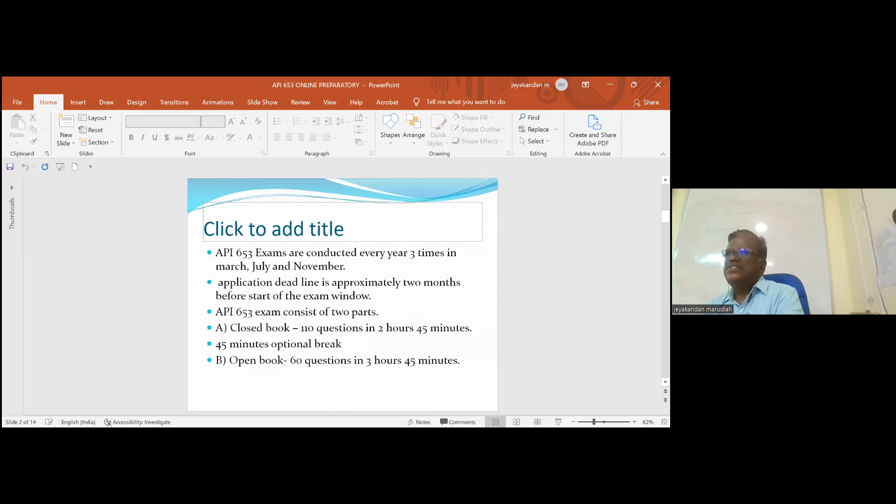653 talks about the in-service inspection of storage tanks. 510 talks about the in-service inspection of pressure vessels, and 570 talks about the in-service inspection of process piping. These three exams are considered major exams in API, and we have many supplementary exams. For example, 571 damage mechanism, 580 RBI risk-based inspection, 936 refractory, 1169 cross-country pipeline. So there are many exams.

Now, many people don't understand the system of API. The first difference between this and other exams like CSWIP, PCN, or AWS is these exams are not conducted throughout the year. They are conducted only 3 times yearly. So they have a fixed schedule - I think since 2014, they are following the same schedule.

Every year in January it will start with 510. January 510, then after 4 months, May 510 and September 510. If you take 570, then next month - February, June, October. If you take 653 - March, then July, then November. This is the schedule. And the next one, April, will be the supplementary exam. This is the schedule they are following.

So first you should know API exams are not conducted throughout the year. We hear many inquiries, people asking, sir, next month I am coming to India, I want to attend the API exam. It is not practically possible because the application deadline ends 2 months before the exam start date.

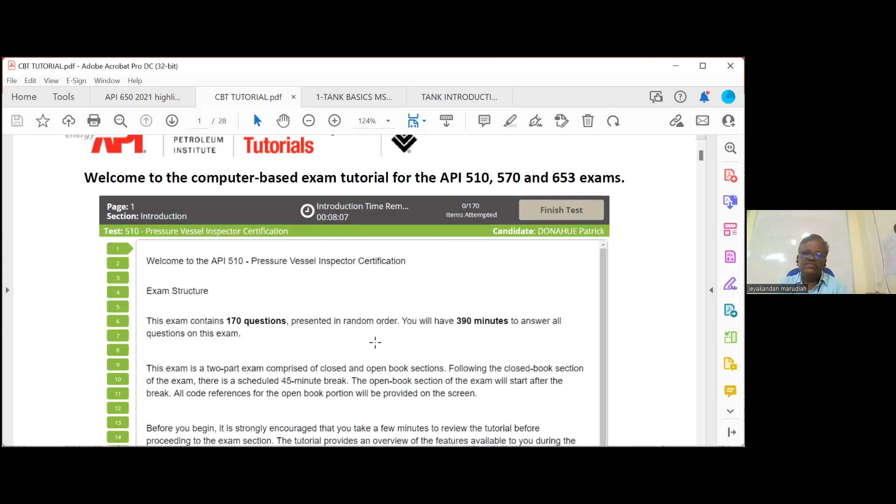Now, what are the key points of this? First, I told there will be 170 questions total. So this is a simple multi-choice question - something like, which of the following biological levels represents the smallest. They've given a sample question; it has nothing to do with biology, our exam is nothing to do with biology. Options like organism, populations, cell - you have to click one.

When you click it, the color will change, meaning you've picked the answer. Now the next doubt you'll have is whether you can change the answer - yes, you can change the answer any number of times. Suppose you want to pick B, pick it. Again, you want to change it to A, you can change it. Any number of times you can change it. The last answer you pick will be recorded by the system.

Okay, then how do you go to the next question? At the bottom there will be a 'next' button. If you want to go back, there will be a 'back' key. Or sometimes you can see the question number at the top.

You can click the question number, it will directly go to the question. So very simple system, not complicated. It's a computer-based testing, we call it CBT. It's a very simple system. Is it clear? So next, you can go back or you can directly go to the question by scroll bar.

You can see which question is not answered, so we can come back to it. You can see that because there is a color change. Once you answer, it is changed to black color, meaning the question is answered. So these questions are not answered. You can just spot whichever is not answered.

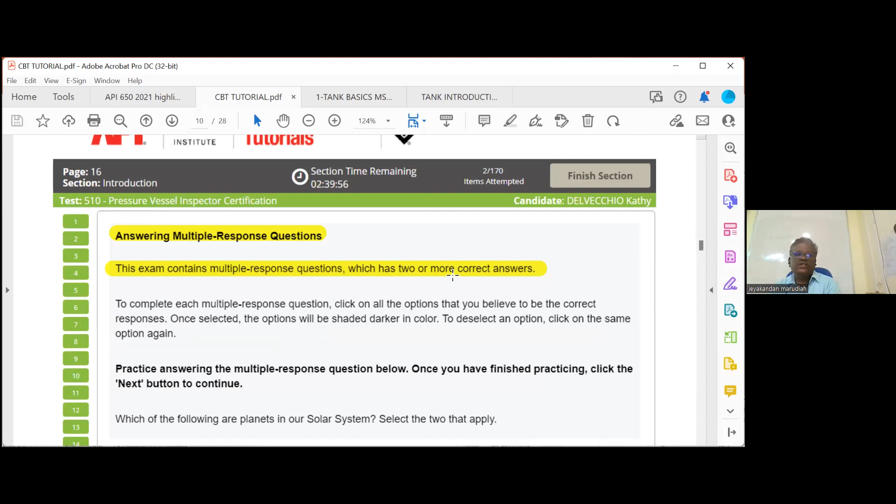Then what is meant by multi-response? The exam contains multi-response questions which have 2 or more correct answers. For example, which of the following planets are in our solar system? They will clearly mention this. Now you will ask, how do I know it is a multi-response question? The question itself will clearly mention it.

The question will say the following question has multiple answers. They will mention 2 or 3, generally multiple. Generally it will have 2, sometimes 3 answers also. So, which of the following planets are in our solar system? You can say Venus, Mars. You have to pick 2. Venus and Mars you have to pick.

Now the disadvantage of this question pattern is, if you get only one correct answer, there is no marking, there is a 0 mark. There is no partial mark. So you can't attend 1 and get 1 mark, 2 and get 2 marks. It's not like that. Everything should be right. Even if 1 is wrong, there will be no mark. Okay, this is called multi-response. Is it clear? That is the second pattern.

The third pattern is drag and drop. What is meant by drag and drop? You can see here we have 4 options: December, horse, June, dog. And we have categories: months of the year, animals. So what is the month of the year? December and June. Click it and drop it. Click it and drop it. Horse and dog, we have to click those. So the answer box should look like this.

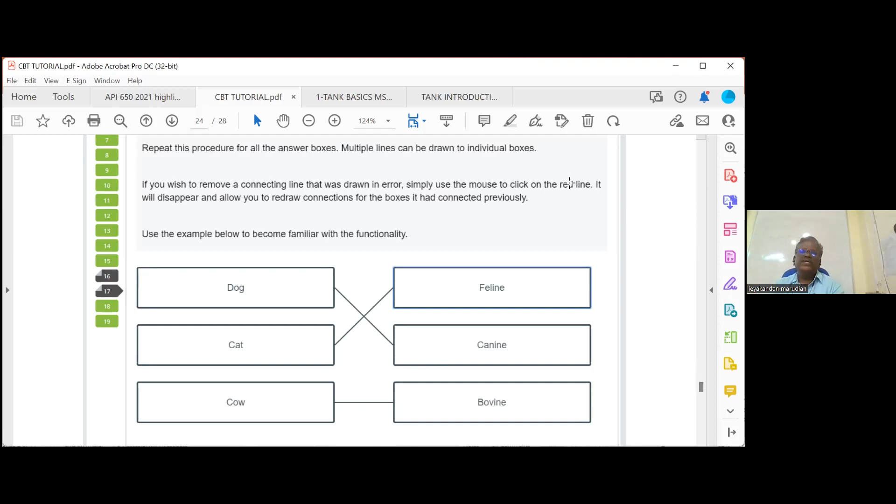So they are converting into... I will explain that. Is it clear? Yes sir. Okay, once you complete the exam, once you finish the exam, there will be a 45 minute break.

During this break, you can go outside, take breakfast, whatever you want, and you have to come within 45 minutes. If you are late, if you come within 15 minutes, no problem, they will switch on the system and allow you to start the exam. But the time will be the same, fixed time only. You cannot add the time. Suppose your first exam you completed in 1 hour, for example.

I have extra 1 hour 45, I have an extra hour - can I add it to the next exam? No, it is not possible. Once you finish the first exam, even if you finish within 1 hour or within 45 minutes, you have to start the next exam. This is programmed like this. The next exam will start automatically.

If you are coming late, the system will start automatically, and the first question will have a timer only. There will be a timer because a watch is not allowed. There will be a timer on the right hand side, and the timer will be running.

Okay, the next one is the open book question. It has 60 questions and the time is 3 hours 45 minutes. Now, same as before, multiple choice will be the majority of questions, maybe 50 questions minimum, then B, C, D all together will have 10 questions.

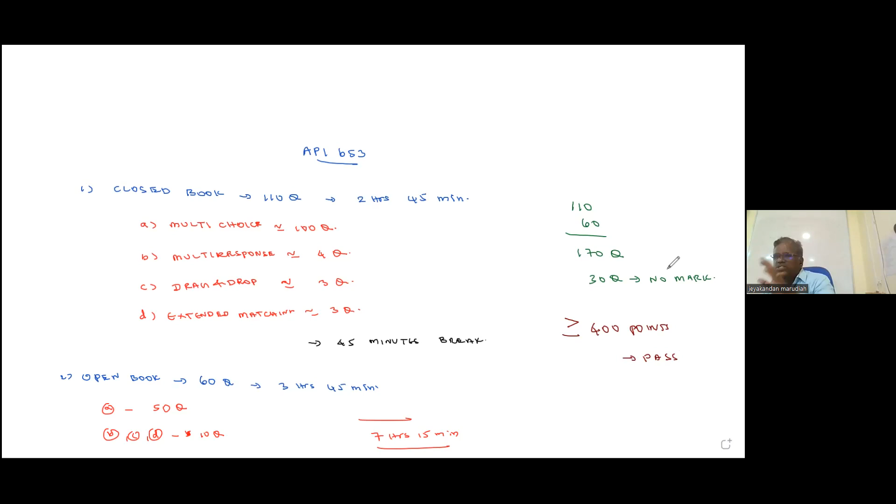Once you finish the test - the first exam finish it, then there is a 45 minutes break, then the second exam will start. There is 3 hours 45 minutes. Then you complete it. Within 15 minutes, exam result will come, hardly, to your mail.

Not the points will come, just a preliminary result will come. They are giving 3 types of preliminary results: preliminary pass, means pass; preliminary fail, means fail; and another result called marginal result. Marginal result means you are neither pass nor fail, you are near the border.

Suppose if you put it in percentage, cutoff is 70%. If you are scoring - because it is system evaluation, there is no manual evaluation, everything you are clicking, system automatically will click - if you score more than 70%, preliminary pass; less than 65%, preliminary fail. But if you are in between 65 to 70, they will hold the results and give marginal results.

So for the marginal results, the final result will come. For all, final result will come after 4 to 6 weeks. It will take a minimum 1 month to 1.5 months. Final result also will come the same day to everybody, to your mail only it will come.

There are 60-40 chances. Those who got marginal result, 60% of the people will pass, even 30 to 40% will fail also.

Once the marginal final result comes, your certificate will be uploaded in the API website. You can access it and take a printout. Even the wallet card also you can take printout of. The hard copy of the certificate will be sent to your home address, but it will take another 1 month, so no need to wait, you can take a printout. Only the certification number is important to apply for any abroad jobs because they can check it, cross check it. So this is how the exam is conducted.

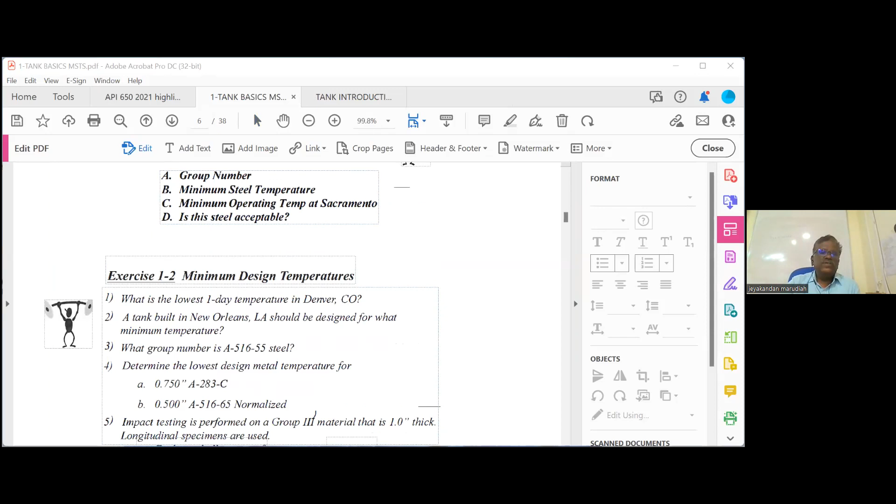So this is the effective sheet for this up to July exam actually. So if you are attending, we have given you the printout - those who are attending directly. So online we will send you soft copies, already sent. So this is for November 2021, March 2022, and July 2022. Okay.

First one, how many code books for our exam? API 571 one, 575 two, 576 three, 577 four, 650 five, 651 six, 652 seven, and 653 eight. So on the API side we have 8 code books, and on the ASME side we have 2 code books, section 5 and section 9. So total we have 10 code books for the exam.

Now, total how many questions do you have to attend? 170 questions. So 10 code books, 170 questions - so each code book 17 questions. It is not like that.

It is not like that—all code books are not equally important. For any API exam, most of the questions will be asked only from 3 or 4 code books. The remaining code books will have just a marginal representation, like 1 or 2 questions only. So out of all this, the main code book is 653.

This is the general pattern—it may change because every year they change it a little bit. But the general pattern is 653 will have 50% of the questions. That's a tough code, 653, the in-service inspection of storage tanks, which will have from 85 to 90 questions. And 650, that is the second important one, 20 to 25 questions.

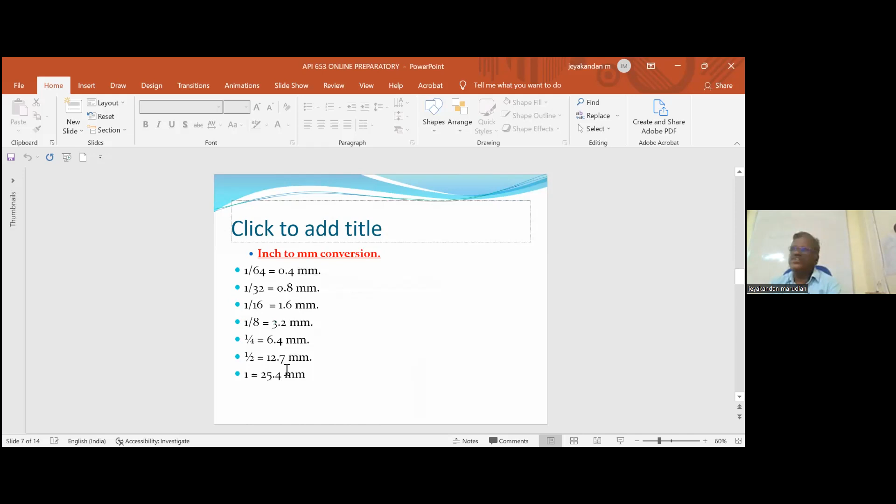Right, now we will go to the actual class. So before starting, I will play a short video on how the tanks work. Before going to that... yes.

So we'll start the class now. All introduction is completed. First question: what is a storage tank? You came here to attend the class for in-service inspection of storage tanks, right? Now the question is, what is a storage tank? Generally our storage tanks, we are going to discuss before, the oil storage tanks only we are going to discuss. Then what is the difference between a storage tank and a pressure vessel?

First, the definition of storage tank: it is a container to store a fluid. It may be liquid or gas. But generally our exam questions will be based on liquid storage tanks, because gas is considered a high pressure storage tank. We are going to discuss only atmospheric pressure storage tanks. So what is atmospheric pressure? I told you, 15 psi. That means inside the storage tank there will be no pressure. What is the outside atmospheric pressure? Same will be the atmospheric pressure, inside the pressure also.

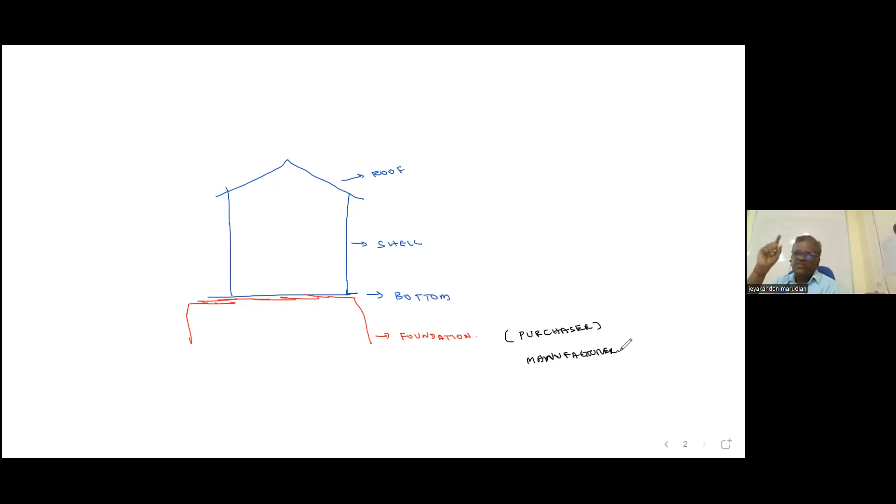Let us start with this. The first one is the bottom. Now if we take the tanks, we are going to discuss a very limited scope - carbon steel storage tanks only, not stainless steel storage. If you take a bottom plate, a tank is a big structure. The bottom plate will have a slope, which we will see later, but the bottom plates are generally lap welded, not butt welded. Lap welding for bottom and roof plates is sufficient. The code does not restrict use of butt weld, but it is not mandatory. If the purchaser wants to butt weld, he can go for it, but it's not a mandatory requirement.

Lap weld is sufficient. Now, if you see, this is my shell and this is my bottom plate. This bottom plate has two names where the shell is seating: one is called the annular plate, another is called the sketch plate. I'll show you the difference. Suppose the bottom plate is like that and the shell is seating on the bottom plate straight away - this location is called a sketch plate. Now, sometimes where the bottom is seating, we will have a high thickness ring for that location, which is butt welded, where the shell will sit. If you're using a high thickness, the other bottom area will be low thickness - only where the shell is seating will have higher thickness. Then these plates are called annular plates.

So now, suppose the bottom plate has the same thickness where the shell is seating, then that area is called a sketch plate - there is no difference in thickness across the entire bottom. But most of the time they will use a higher thickness where the shell is seating, then that is called the annular plate. Now, the code requirement is that the annular plate should always be butt welded - lap welding is not allowed. Whereas annular plate to other bottom plates, we will make a lap weld.

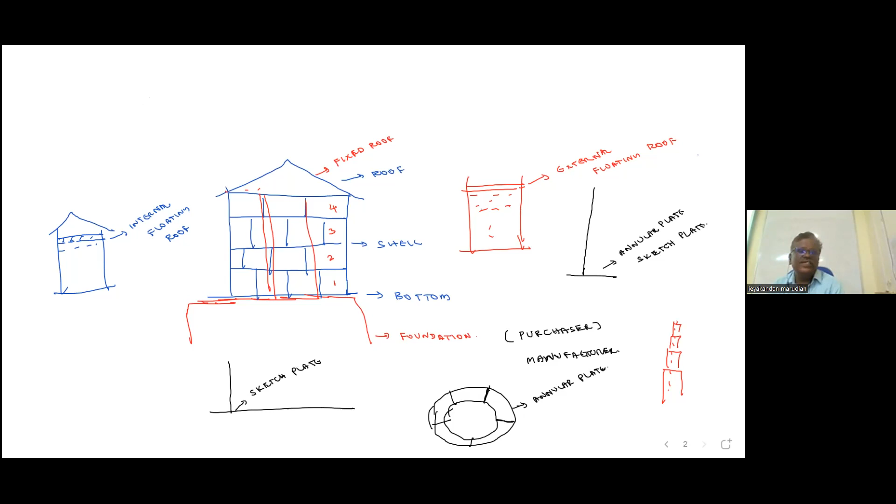For shell to bottom, it is not a lap joint, it will be a fillet weld. Shell to bottom, how is it a T joint actually - fillet weld, it is a double-sided fillet weld generally. But when you are using high thickness, you have to edge prepare in the shell plate, it is a bevel with fillet.

Lap joint, butt joint - I will show you the video for the annular ring. Just watch the video, then ask questions. I think the video will answer most of your questions.

So generally tanks are not constructed one by one, they are constructed in groups actually.

So first we have to prepare the foundation. This is the concrete ring wall. Generally the shell will be seated at the center of the concrete ring wall. What should be the thickness of the concrete ring wall? It should be at least 1 foot - 1 foot means 12 inches, we will use foot only here. So at least 1 foot it should be there.

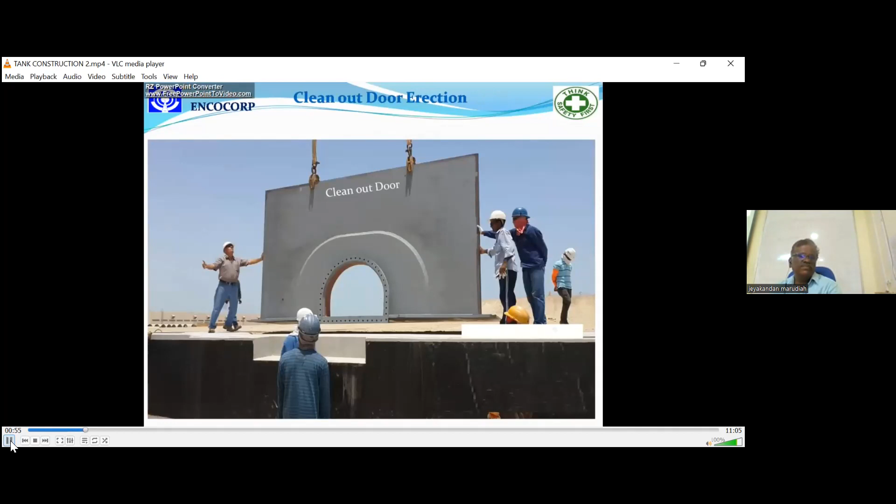So this is the annular plate. This ring is called the annular ring. I told you this annular to annular joint will always be a butt joint, lap joints are not allowed between the annular plates. Yes, butt joint with the backing strip, or you can go for double V also as per code. Both sides of welding is possible, so you can use this butt joint. They welded it, this is annular plate, annular plate, annular plate - they will be a butt joint.

So this is the bottom plate. You can see here annular to bottom plate will be a lap joint. They will lap, that is a requirement. But somebody told that they are going for butt joint. It is, everywhere there are exceptions allowed. So this is a bottom plate.

Overlap, I will say, minimum maximum 2 inch. Maximum 2 inch, 50 mm maximum overlap. But if you are welding single side, maximum 1 inch overlap. These are the code requirements.

Please remember, code requirements may be overruled by your project specification. You can go more stringent than the code requirements. But the exam questions are based on the code requirements only. So you have to understand the code requirements. Practically, you may be deviating from this because of your project rules.

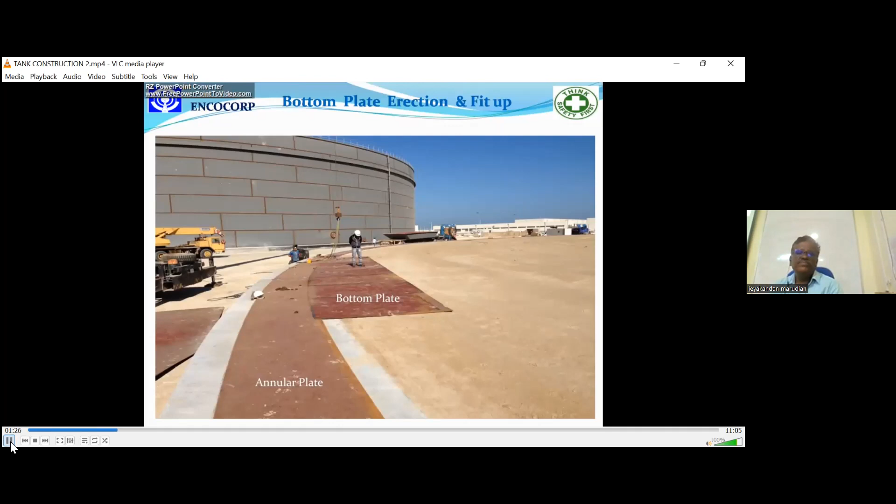So this is the bottom plate. So they will lap it. You can see here bottom lap, here there is a lap. Everywhere there will be lap. It is a complete lap there.

So this is the outlet sump. What is the purpose of outlet sump? Oil storage tanks will have at the bottom a water layer, because when they are drilling oil, oil will have some water mixed in it, or even rainwater enters it.

You know what is the specific gravity of water? The specific gravity of water is 1. And most of the oil stored has specific gravity less than 1. That's why if you take a bottle of water and put it on the oil, water will go down and oil will float. Okay, same way.

So generally water will come down to the bottom. That is called BSW, bottom sediment and water. There will be a layer which you have to remove periodically. Otherwise water, which is highly corrosive, will corrode the tank. So we need a sump, and there will be a pipeline connected outside it with the wall, so periodically they will check for any water and drain it. That's why we are maintaining a slope on the bottom, so that it will be drained.

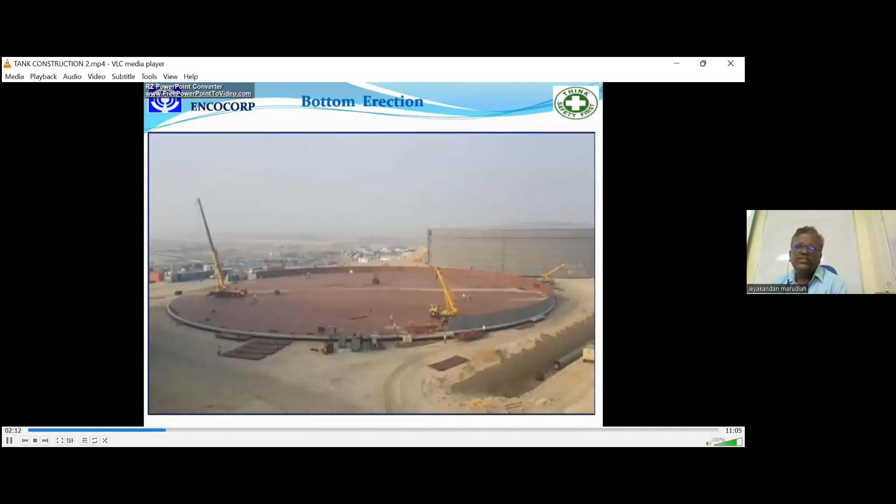So this again is a drain sump, because it will have a minimum of 3 to 4 drain sumps. We are keeping the slope like this. This is one type of erection. We have many types of storage tanks, just a sample one.

Now we will go to the shell. So shell 1, they started erecting. Shell to shell it will be always vertical. Shell to shell vertical joint. Vertical joints are called vertical joints, they are more critical. Okay, so that one is horizontal.

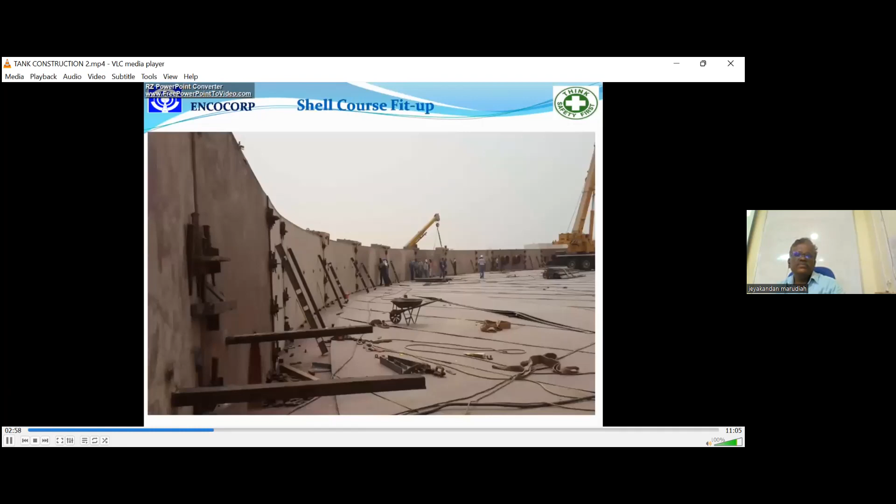Horizontal also they will make a butt weld only. Tank is a massive structure, big structure actually. So this is a vertical joint. I think they are using some automatic welding process, electro gas welding. It's one of the popular auto welding processes in tanks actually.

Then shell course 2. So you can see this is what I told, staggering. The distance between this vertical joint and this vertical joint should be at least 5 times the thickness of course number 1, it should be 5T of the thicker one. Which one will be the thick one? Course number 1 will be the thicker. Every course like this only.

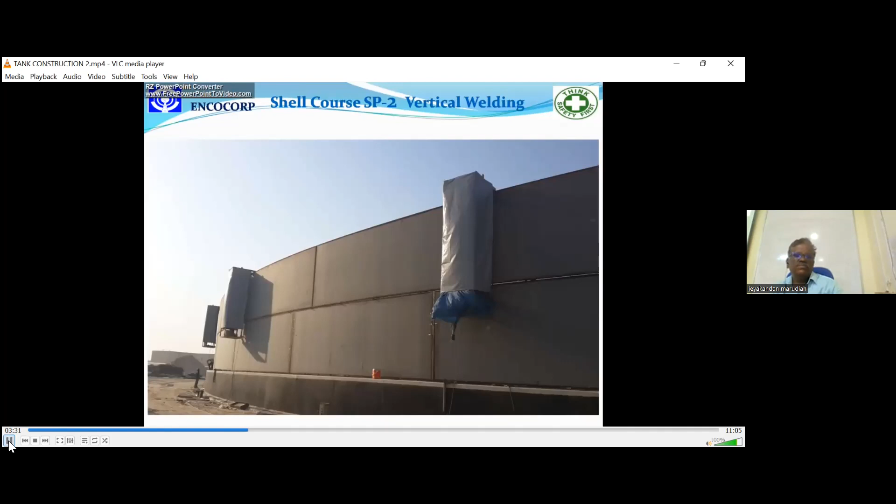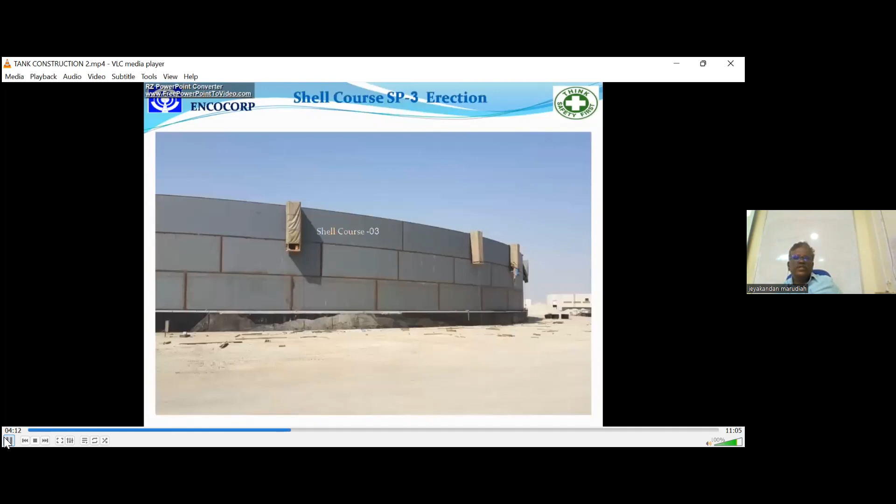So this is horizontal welding. Shell course 3. After 2, there will be everywhere a stagger. The temporary hatch doors, shell course 4 erection.

So this is the wind girder. You can see that there is a girder there. So 1, 2, top shell course. What is the purpose of wind girder? One is the wind, to break the wind. Another one is to maintain the shape of the tank, the round shape, because there will be a lot of wind and the shape cannot change. So that is a wind girder. Wind girder will be at the top shell course.

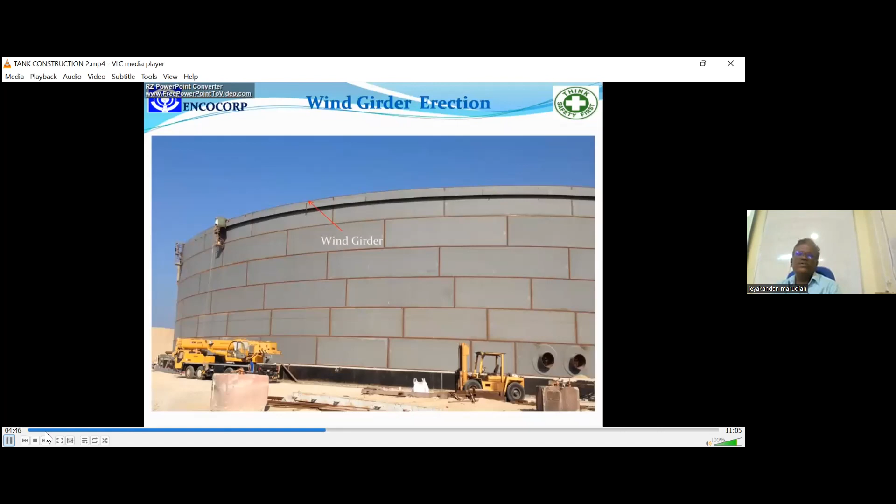So this is called top angle or curb angle. What is the purpose of this angle? From this only the roof plate will be welded. Roof plate will be welded, lap welded again with the shell on one side. See the angle, you know what is the shape of angle? One side it will be welded with the roof plate. So top angle they will call it.

So, or curb angle, they will call it. Now they are going to do the roof erection.

So this is the center column. In the middle of this there will be one column. Column is a vertical one, but they have many columns. You can see many columns to support the roof. Without columns, that is called self-support.

See, this is called girder. Girder means the horizontal one. Column is the vertical one. Rafter means the inclined one. Over the rafter only, roof plates are laid out and lap welded.

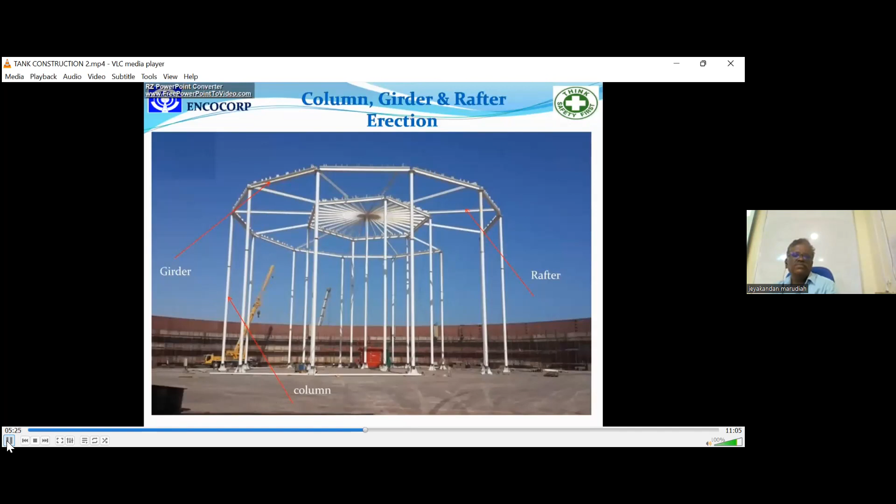So from the center they will go on extending, then finally it will attach with the shell.

Okay, so this is how the final structure will look like.

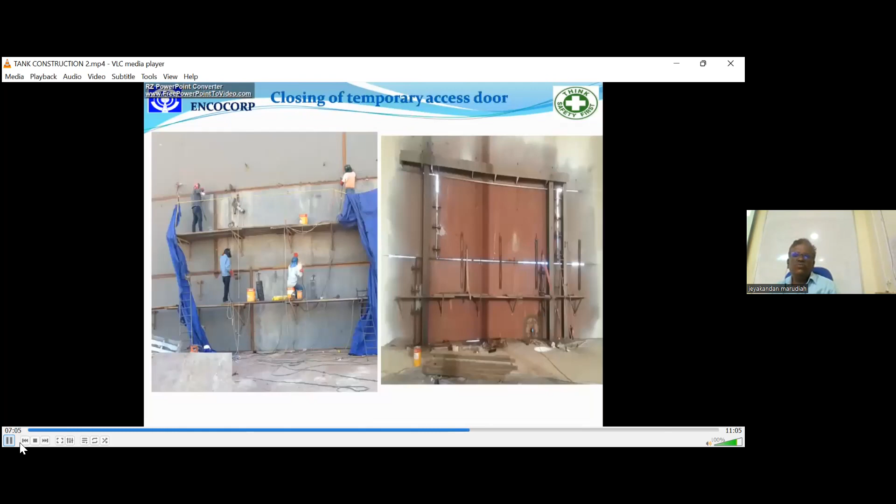Roof can be welded on one side only. Bottom plate is single side lap welding. Roof also only has top side welding. So wherever there was an opening before, they will close the opening finally.

Yeah, a lot of attachments. They will have many things in the tanks.

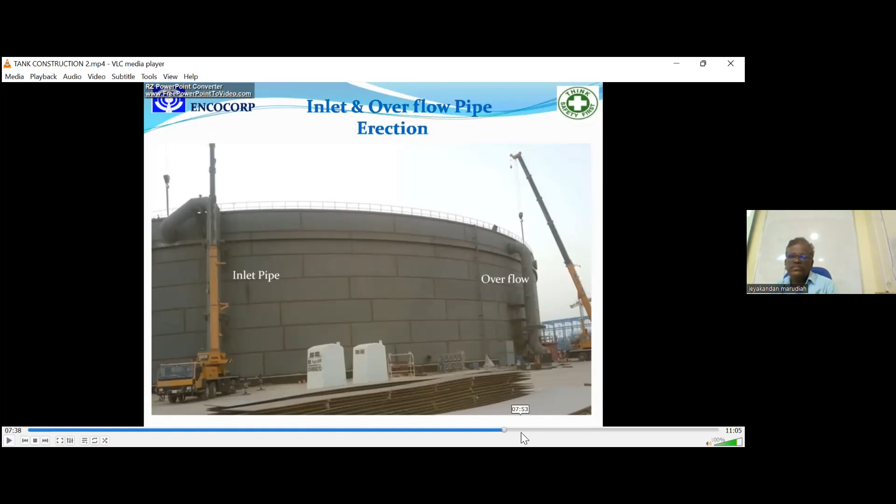Then we will have here ladders. Okay, this is the ladders. Then this is the handrails, roof handrails erection. Then rain down pipe from the roof. Any rainwater we have to bring down, that is the rain down pipe.

Painting, leave it, painting not required. Now we will go about one more thing, about the floating roof tanks. Just a short video.

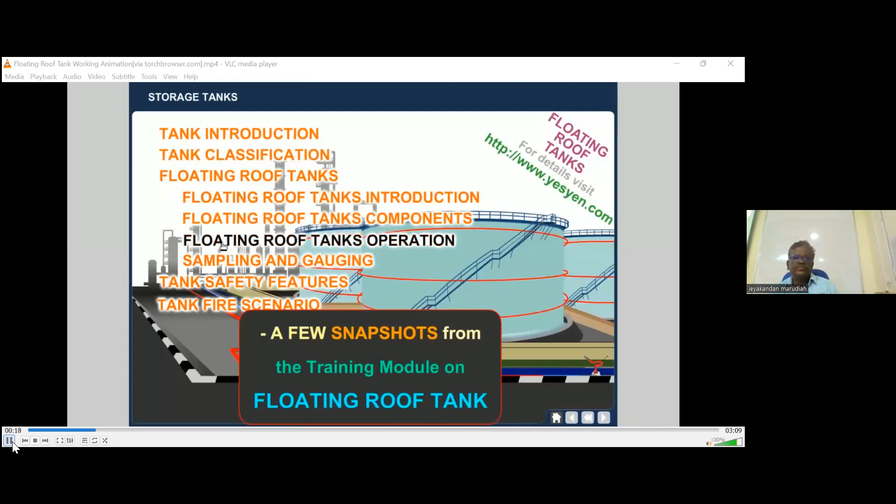So this is a floating roof tank. So we have fixed roof tank, spherical tank, external floating roof tanks, and the internal floating roof tanks. It depends on what you are storing.

So this is the external floating roof. You can see the roof visible, then it is external floating roof. If you see the cross section of the floating roof, because there will be vapor losses, to avoid the vapor losses only we are going for the floating roof.

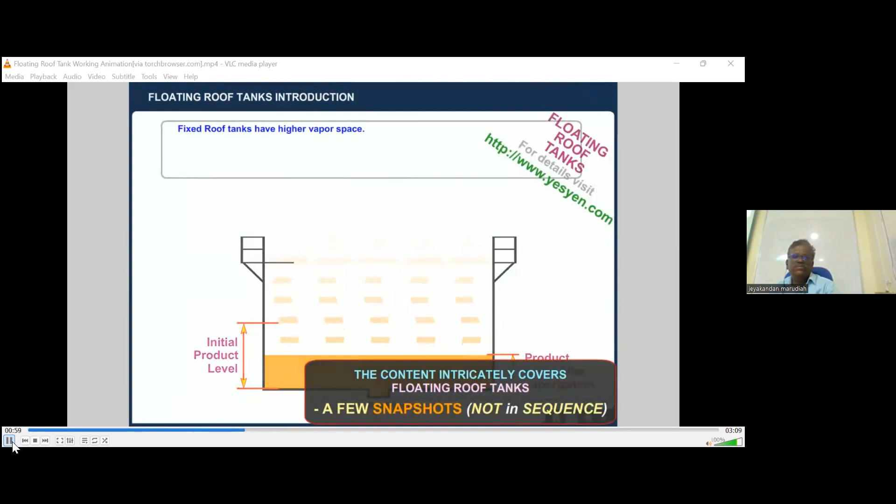Okay, this is a drain plug, into the swing check valves. So because all the water should collect here, from that there will be inside, there will be a drain pipe, which will come at the bottom. Okay, that is the purpose of the drain plug.

And this is the breather vents, we call it as a pressure and vacuum vent. So when you are filling the tank, there will be a pressure buildup, it will automatically open and release the pressure. And even when you are draining, there will be a vacuum creation, it will break the vacuum.

And these are very, very important, these are called seals. Because what is the purpose of the floating roof? To avoid the vapor loss. The side should not let vapor escape outside, so there will be a seal. This top one is called the secondary seal, bottom one is called the primary seal.

Primary seal means like a spring type, you can see here, read here. The function of the primary seal is to minimize vapor loss, centralize the floating, and exclude snow and rain. This is the primary seal, it will be attached with the shell, so there will be no gap required, so vapor cannot escape. Shell attached.

So you can see here, this will be the secondary seal, this one. And this is the drain line, inlet to water drain line. Rolling ladder, this is the top one, there is a rolling ladder because the floating roof will float, it will go up and go down.

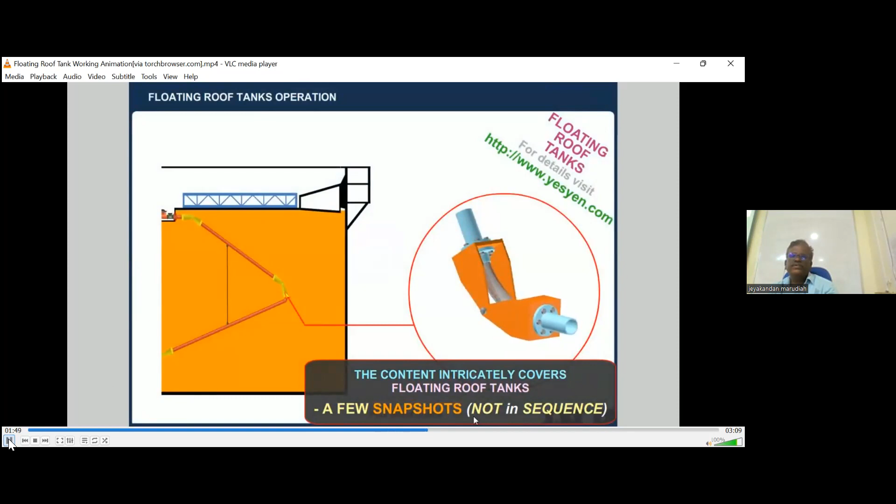This is to take the sample actually, for sampling and gauging how much liquid level is there to check. And sometimes if there is a fire, there will be a foam spraying arrangement to extinguish the fire.

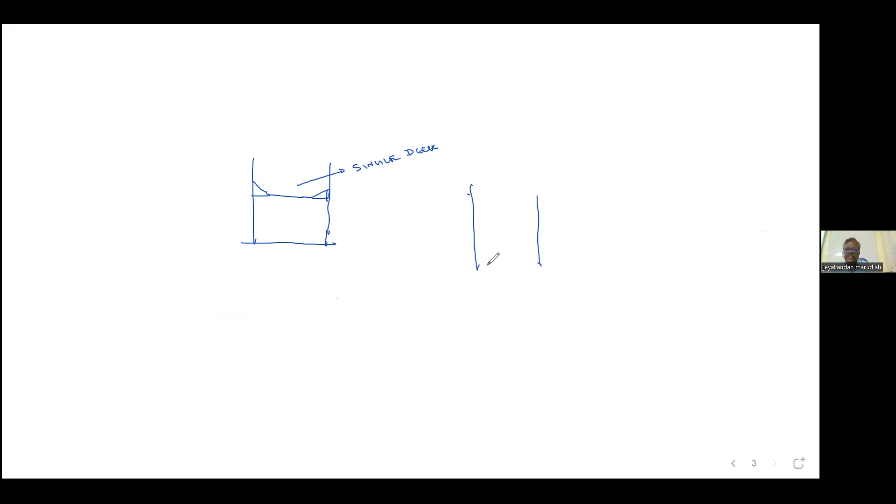Double deck means completely there will be a floating arrangement, two decks. The entire tank roof will be floating. That is called double deck - we have one deck here, one deck plate, one deck. This is called a double deck.

650 covers both the single deck as well as double deck floating roof. Another one is, for our exam point of view, what is the maximum diameter tank covered? Very, very important - up to 200 feet only for our exam scope. So what is the maximum diameter? 200 feet. What is the maximum temperature? 200 degree Fahrenheit - the inside product temperature should be 200 degree Fahrenheit.

Any tank operating more than 200 degree Fahrenheit, up to 500, is covered in Annexure M, which is not part of our exam, but you should know. So tank means Annexure M also there. So up to 200 degree Fahrenheit, 650 covers. 650 has many annexures. Annexure M covers 200 to 500 degree Fahrenheit.

So what is the maximum diameter? 200 feet. 650 covers large diameter, but our exam scope is only up to 200 feet. Exam question will be up to 200 feet diameter only. Temperature up to 200 degree Fahrenheit. Annexure M covers 200 to 500 degree Fahrenheit.

Now, what is the internal pressure? What will be the tank internal pressure? I told atmospheric pressure, but there may be some pressure allowed. What is the pressure inside allowed is up to 2.5 psi. Up to 2.5 psi, 650 covers.

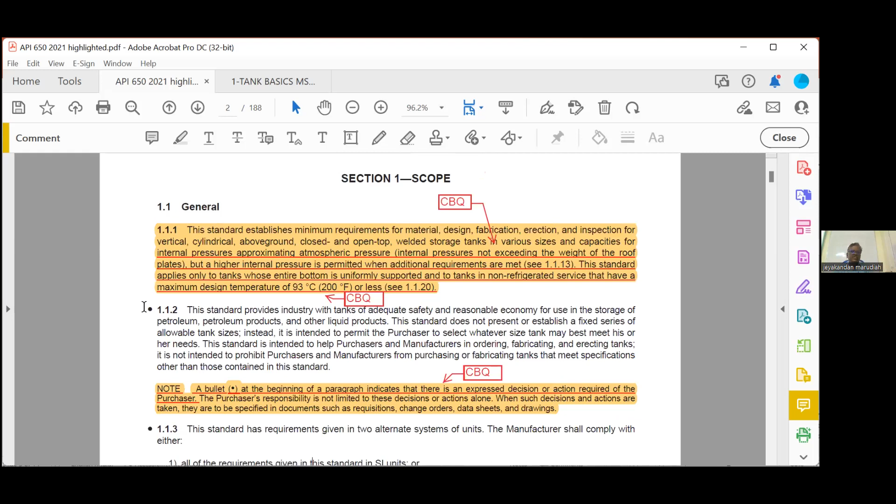Now, if you see the code, sometimes you can see a bullet at the beginning of a paragraph which indicates there is an express decision and action required by the purchaser. Suppose a bullet is at the paragraph starting, like 1.1.2, it means the purchaser has to take the action.

Then please go to the next page. 1.1.13 - Annexure F provides requirements for tanks subject to small internal pressure. Suppose we have an internal pressure, Annexure F, there is an annexure - each annexure has some requirements. Highlight this one. Then this is very important - Annexure M provides this also, mark CBQ. So Annexure F also mark it.

So annexure M, yes. CBQ mark. Annexure M provides requirement for tanks with a maximum design temperature exceeding 200 but not exceeding 500 degrees Fahrenheit. Very, very important. 200 to 500, annexure M provides the requirement.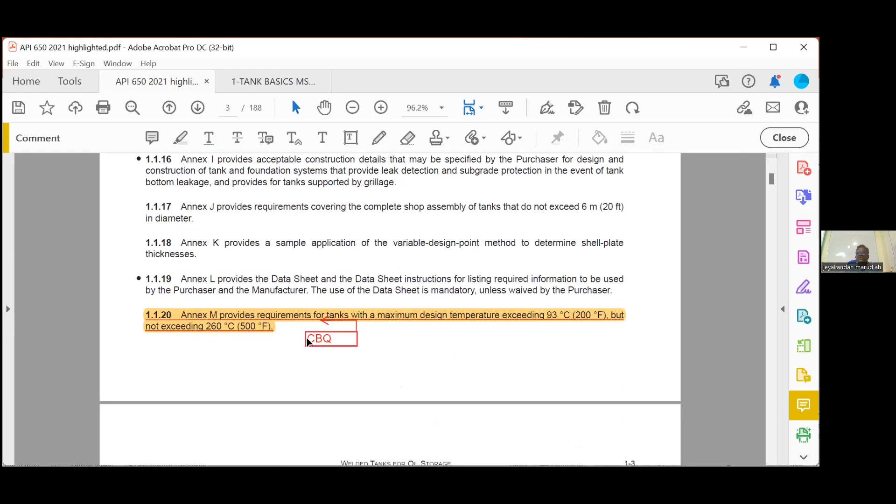Limitation, not exceeding. So highlight the next one, 1.1-4. The manufacturer is responsible for complying with all provisions of this standard. Even without a question, some areas we will mark. Okay, these are important. 1.3.1, highlight the first line. The manufacturer is responsible for complying with all provisions of the standard.

Then any jurisdiction. What is meant by jurisdiction? It means local government body. Every government has authority. Please remember, the local government has more authority than code. Local government has more power. So suppose when you are constructing a tank, you have to get permission from the local jurisdiction.

Who is responsible for this? Owner. Owner means purchaser. Purchaser is responsible. So highlight this one: the purchaser shall provide any jurisdictional site permit that may be required to erect the tank, including permit for disposal of the hydro test water. The manufacturer shall provide all other permits that may be required to complete the transport of the tank. That is a closed book question. So it is the responsibility of the purchaser to get the local jurisdiction permit.

That's all of chapter 1. Okay, chapter 1 maybe one question in the exam. Maybe, very rarely exam question is asked. But if they ask, this is the favorite question: 200 to 500, which code covers? That is the annexure M.

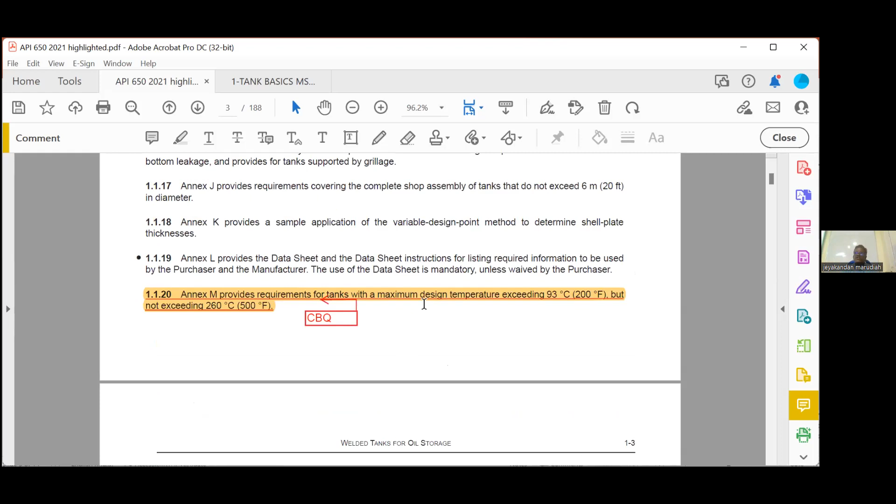Okay, so what we will do: up to 1 o'clock we will cover the code book. In the afternoon, half an hour, we will cover questions also. Okay, simultaneously we will cover questions also. So let us go to chapter 3, terms and definitions.

What is meant by annular ring? That is an important open book question. It was asked, what is annular ring? I told you, the ring formed by the annular plate. And what is the important thing I told? The annular plate welding should be a butt weld only. There are two options given in the code.

It can be a single V with the backing strip, or double V also allowed by the code. But with double V, the problem is you have to lift that, then weld backward. Okay, we have to lift it. If it is possible, we can go for it. Yeah, go for it, it is allowed by the code. For high thickness, double V is also allowed, or single V with the backing strip also allowed. Yeah, both are allowed by the code.

The complete collection of annular plates positioned around the perimeter of a tank bottom whose radial lengths are substantially equal. Okay, radial means width should be equal. Radial length, not cross section, width only equal. Okay, that is an open book question.

Now, what is the difference between painting, coating, and lining? Painting, coating, lining. Coating is provided for corrosion protection or erosion protection. Painting is for corrosion protection as well as decoration or appearance. Lining is also the same. The difference between coating and lining is that lining can be removed.

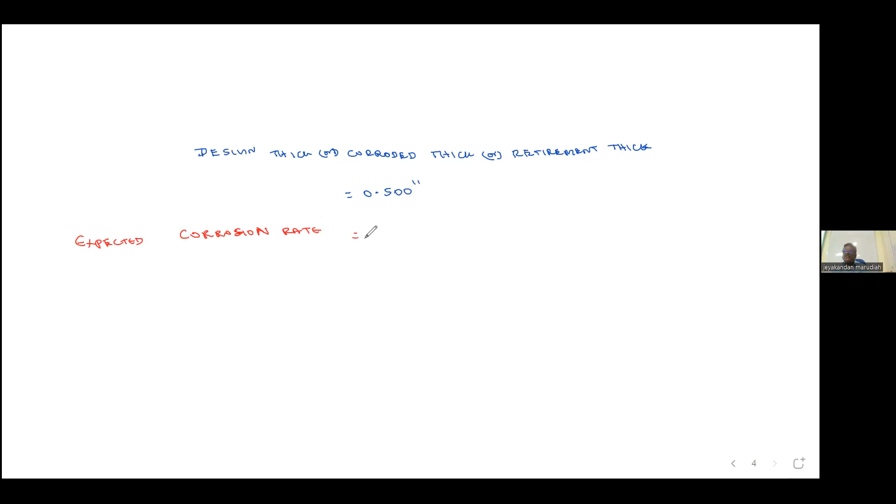So it is expected. We don't know if the tank may perform the same way or differ. Expected corrosion rate - the owner will have some idea based on his previous experience, and based on material available. For example, he says 0.01 inch per year. Corrosion rate is always mentioned in inch per year, or if you multiply by 1000, you get mils per year. No problem, so inch per year.

Then the next question will ask how much service life you want for the tank. Service life means how many years you want the tank in operation. Suppose owner says, I want it for 30 years. So he wants the tank in operation for 30 years. Every year, how much will it corrode? 0.01, multiply this by 30, is called the corrosion allowance. So corrosion allowance equals 30 multiplied by 0.01, you get 0.3 inch.

Then he will add the plate. That plate is called the nominal thickness, or ordered thickness. Ordered thickness equals 0.5 inch plus 0.3 inch, that is equal to 0.8 inch. You understand this terminology? So nominal thickness, ordered thickness, always with the corrosion allowance. Design thickness, corroded thickness, retirement thickness - these terminologies are always without corrosion allowance. This you have to understand. So please write this or copy this.

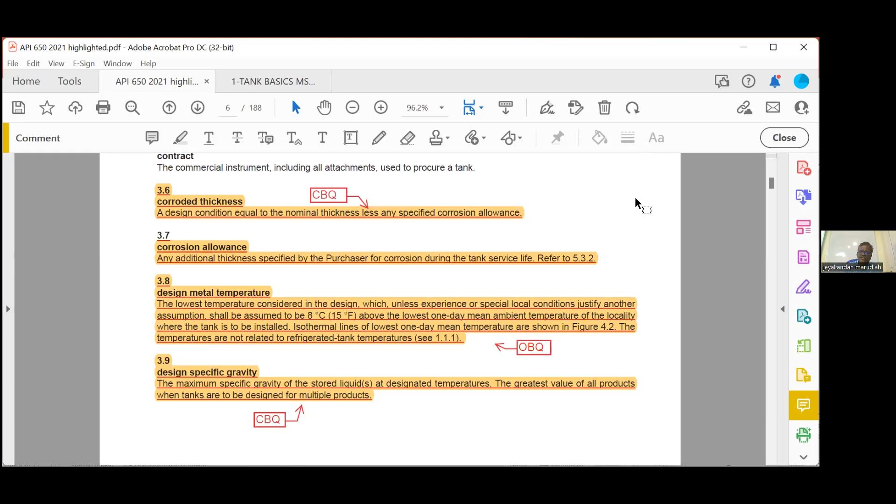Now, how will the exam question be asked? Regularly they are asking one exam question, open book, on this. I told in the previous chapter, the exam question asked was the Annexure M provides 200 to 500 - that is important. Here, they will give some UST, so for that you have to refer the US map. So please go to page number 4-10, page number 4-10.

You can see the US map, okay? Because it is American code. Now read that at the bottom - what is given is isothermal lines for the lowest one-day mean temperature. If they ask in the exam, it is a one-day mean temperature only that is given. But they may ask two types of questions. What is the one-day mean temperature of a particular location? You have to refer to it.

For example, I am asking Dallas. You can see Dallas here, I highlighted, you can see it is the city of Dallas. So whichever line is close to Dallas, you have to follow the line and see what temperature is given. Just to check, where Dallas starts, what is the temperature? 0 degrees. So a tank installed in Dallas, if they ask one-day mean temperature, answer is 0 degrees. What is the design temperature? 0 plus 15, then it will be 15 degrees Fahrenheit.

Now let us try once. Highlight this one - what is the answer? A tank built in New Orleans, LA means Los Angeles. What should be the design minimum temperature for tanks located in Los Angeles? Any US visitor here, where will Los Angeles come? So answer - we have to go here, you can see Los Angeles is here. Los Angeles temperature is 35, plus 15 we have to add. A tank located in Los Angeles will have the design temperature of 50 degrees Fahrenheit.

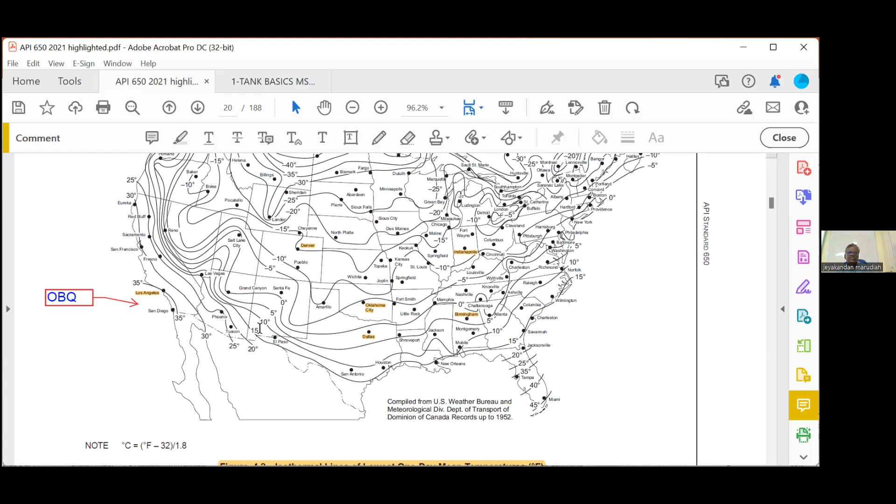So you can see the problem you sometimes face. Suppose if it is coming in the middle, if it is close to any line, you can easily identify the term. Suppose it's in the middle, generally we have to take the average. But generally most things will be close to some line, so you have to follow it. You can see here 35, 30, 25, 20, 15, 10, 5, 0, minus 5, it will go like this. When you go here, it will be minus 50 degrees.

You remember now what is the Ukraine temperature now? The students are working at minus 5 degrees centigrade. Ukraine, there is a problem and a lot of Indians are struggling there. So the minus will be on the US side, it will go up to minus 50. This side it will always be plus.

Any doubts? This question was regularly asked. Again I will repeat - many people understand the question but answer it wrongly. You have to check what they are asking in the question. Suppose they ask, what is the one-day mean temperature of Los Angeles? Answer is 35 degrees. What is the design temperature of the tank located at Los Angeles? It is 35 plus 15, it will be 50 degrees. You should not answer wrong - see what is the heading here: isothermal lines for lowest one-day mean temperature. Is it okay? Right, please come back.

Yeah, two types of questions they may ask. Highlight this one: the lowest temperature considered to design, unless experience or special conditions justify another assumption, is 15 degrees above the lowest one-day mean ambient temperature of the locality.

Now, design specific gravity. I told you a little bit before - what is the design specific gravity of water? 1. Now when designing a shell and calculating shell thickness, we have to use the specific gravity of the product you are going to store. It may be 0.9, 0.8, whatever it may be. Suppose the owner has in mind he wants to store multiple products - 5 years he will store this one, another 5 years he can store another one. So which one is the highest specific gravity he has to use for calculation?

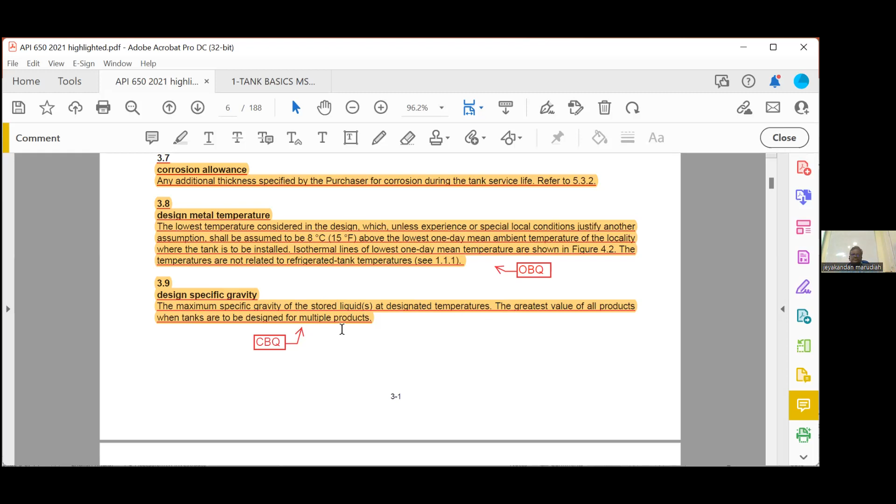It is a closed book question.

Design thickness is without the corrosion allowance. Design thickness, corroded thickness, minimum required thickness, retirement thickness - all are without the corrosion allowance. Only nominal thickness, ordered thickness, is with the corrosion allowance. Design thickness is the thickness necessary to satisfy tension and compression strength requirements in absence of, by good accepted engineering practice, without regard to construction limitations or corrosion allowance. So design thickness is without corrosion allowance. That is a closed book question.

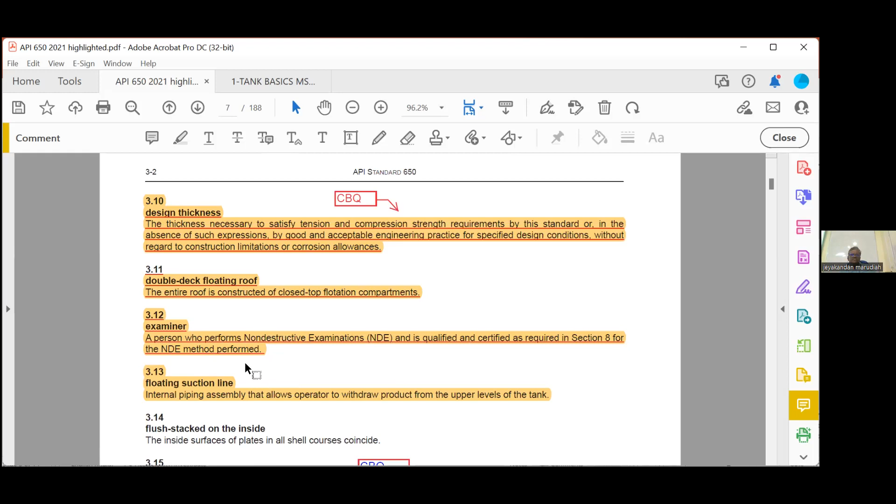Then who is the examiner? Examiner means nothing but an NDT technician. As per API, it is not NDT, it is NDE - non-destructive examination. Examiner means the technician, a person who performed the non-destructive exam and is qualified and certified in the NDE method.

Then inlet diffusers. What is meant by inlet diffuser? You know the inlet pipeline - if the liquid is falling under pressure, it can erode the area. So they will distribute using some diffusers, spreading, spraying. That is inlet diffuser.

Internal fill line piping with impingement plate, baffle, slots or lateral openings. Diffuser limits splashing and misting of product, prevents product impingement of internal components, and disperses gases introduced into the tank. That is called a diffuser.

Now, next one is important. What is an insert plate? See, I have a tank. Now, I want to insert a nozzle here.

Generally what we will do is, after shell fabrication, we cut a hole and weld the nozzle. We want to install many nozzles - they will make a cut hole, insert a pipe and weld it. There is no problem. But sometimes, for example, any nozzle greater than 12 inch or shell plate thickness greater than 1 inch requires PWHT. Only nozzle PWHT is required, not the tank. So if you insert the nozzle, weld it, making this area PWHT is very difficult.

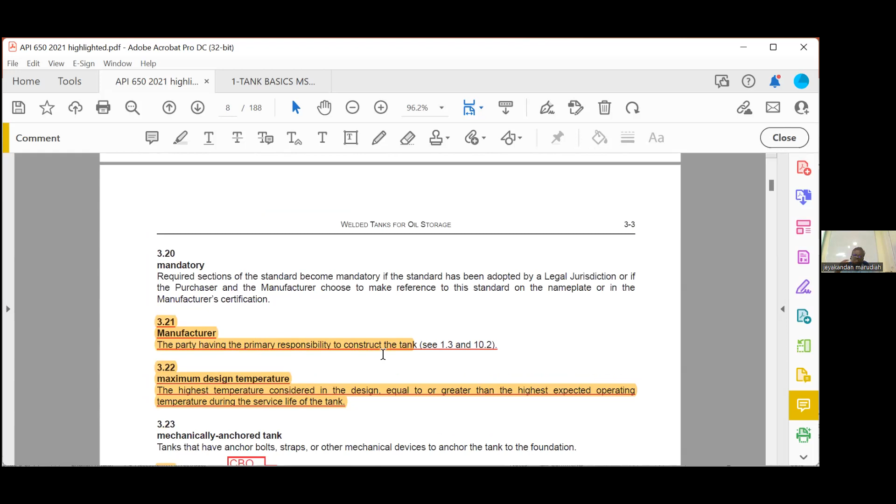The next one, highlight this one - manufacturer. Who is the manufacturer? The party having the primary responsibility to construct the tank. So who is constructing the tank is called the manufacturer.

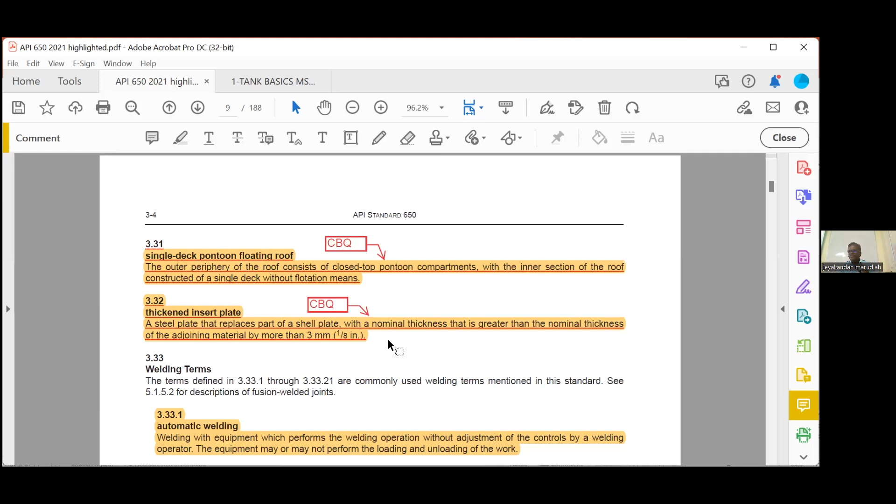That's all for section 3. Right, now let us see how much you understand so far of what we have covered. So we'll start with the section 1 questions.

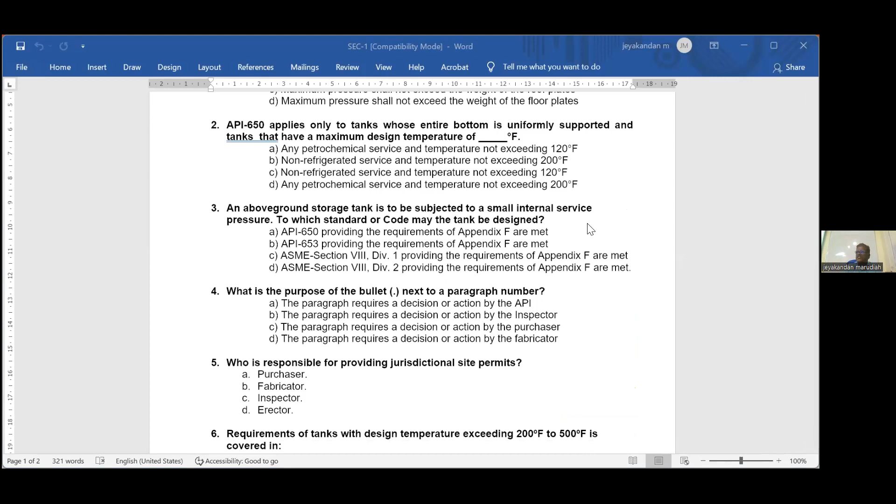Annexure F - which Annexure F, 650 Annexure F or 653 Annexure F? So the answer is 650 Annexure F. It's on the next page, the answer is there, we already highlighted it here. So this is Annexure F - it provides the design for tanks with a small internal pressure.

See, wherever we marked, the question is there. Okay, next one.

Next: what is the purpose of the bullet next to the paragraph? As I told, the paragraph requires decision action by the purchaser.

Okay, then next: who is responsible for providing jurisdiction, site permits - who is responsible for jurisdiction? Purchaser - the answer is purchaser. I think you can locate it, no need to go here and there. If you are not able to locate it, just answer - I will show you because we mark everything.

Next: requirements of tanks with design temperature exceeding 200 to 500 - Annexure M. Out of six questions, this is the important one. If they ask in the exam, this is the question they ask regularly. Annexure M - they can also ask the reverse: Annexure M provides requirements for what temperature range? Then the answer will be 200 to 500. We have to choose - answer will be less than 200, above 500, or 200 to 500. So the question can be the answer, and the answer can be the question too.

So this is section 1. Is it okay, Sriram? Sir, yes sir, okay right.

So we will go to section 3 also - we will review that question, then we will go to the next one.

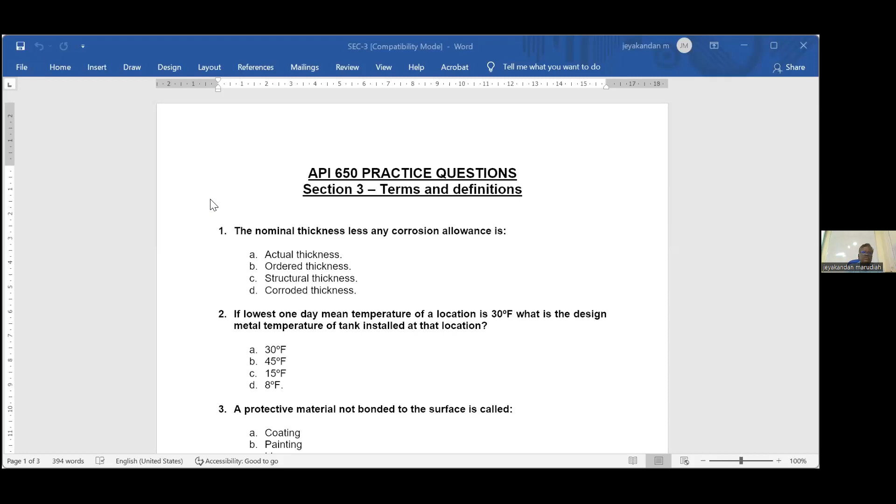Right, please read it. Nominal thickness, less any corrosion allowance - what is the answer for that? Ordered thickness with the corrosion allowance. Nominal thickness less any corrosion allowance - answer is corroded thickness.

Answer is corroded thickness. Okay, next one. If the lowest one day mean temperature of the location is 30 degrees Fahrenheit, what is the design temperature installed at that location? Answer is 45 - that's 30 plus 15.

Protective material not bonded to the surface is called a liner. So it is not bonded to the surface - that is the liner.

Next, design specific gravity is generally the maximum. If they specifically ask for floating roof, then it will be the lowest minimum. Generally when they ask design specific gravity, it means maximum only - the maximum specific gravity of the stored fluid.

Next: outer periphery of the roof consists of closed top pontoon compartments with a liner section, with the inner section of the roof constructed of a single deck without flotation - this means single deck pontoon floating roof. That is the definition of single deck pontoon.

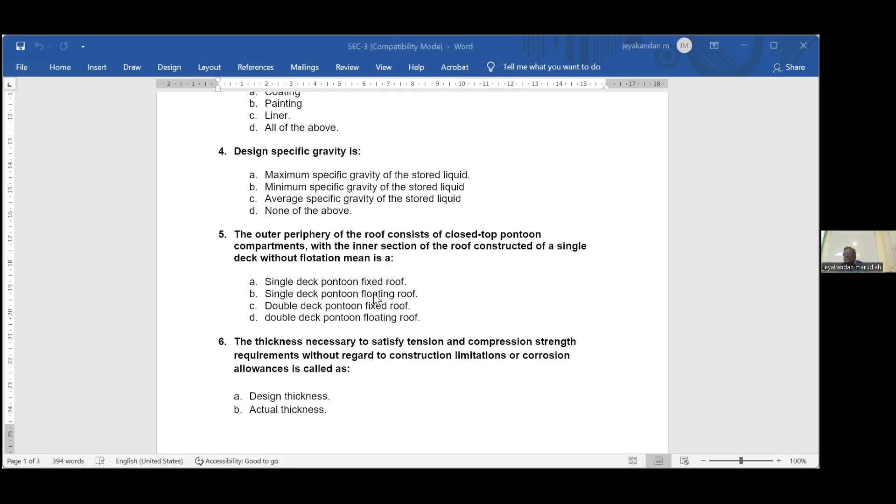Sir, pontoon thickness necessary - the pontoon has a box structure. Okay, next: the thickness necessary to satisfy tension and compression strength requirements without regard to construction limitations, corrosion allowance, is called as...

There is a design thickness - that is the definition of the design thickness. The design thickness necessary to satisfy tension and compression requirements - that is the definition.

Okay, next: when tanks are to be designed for multi-product, the specific gravity used for floating roof design is minimum - the floating roof minimum specific gravity. Okay, you read it yourself.

Next, number 8: if the thickness which includes any corrosion allowance, that includes for requirements of weld spacing, minimum and maximum thickness variation - answer is B and C.

Nominal or ordered thickness - you will order the plate. Nominal thickness means with the corrosion allowance. That plate only we will receive, and from that only we will make the welding. PQR, WPS, welding, NDT, PWHT, impact test - everything will be with the corrosion allowance included. That plate also.

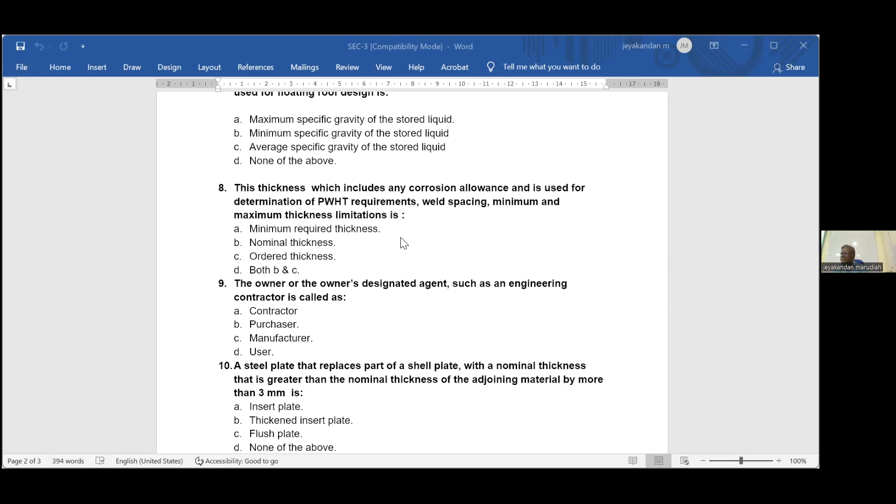Next: the owner or the owner's designated agent such as an engineering contractor is called as - it is not contractor. They are using the word purchaser. The code language is purchaser.

A steel plate that replaces part of the shell plate with a nominal thickness greater than the nominal thickness of the adjoining material by more than 3 mm is - it is a thickened insert plate. If it is more than 3 mm, thickened insert plate. Otherwise it is an insert plate - 3 mm or less than 3 mm is insert plate.

That's all. So if you are able to answer all these questions, definitely you can attend all exam questions.

Now first understand - how many of you are welding inspectors? 1, 2, 3, 4, okay. What is P number? P number is the grouping of material by ASME Section 9 to reduce the number of PQRs. That is entirely different.

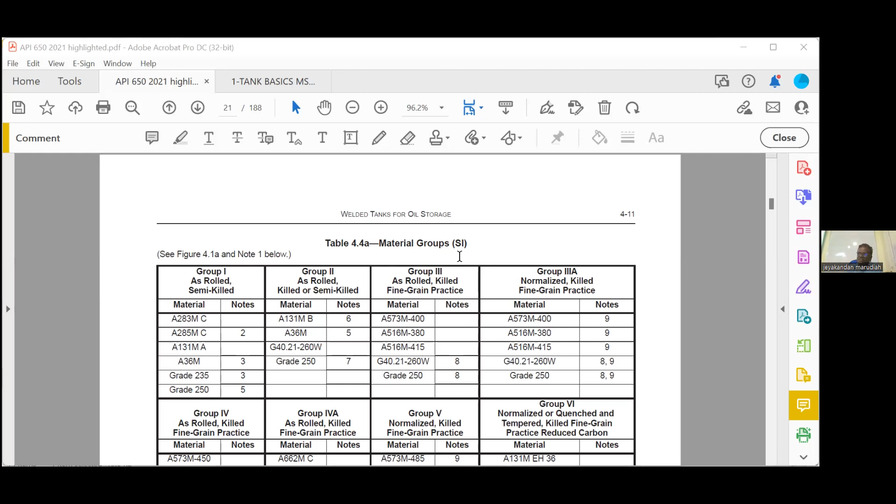So again, I will repeat: in 650 and 653, all tables will be repeated. A will be SI - they are following some uniformity. A tables are SI units, B tables are American system. We will always follow B tables. Is it clear? USC meaning United States Customary Units - we are following United States Customary Units only.

Now this is the normally used carbon steel storage tank materials. You can see how many groups they have: Group 1, 2, 3, 3A, 4, 4A, 5, 6. You should understand this, not remember it, just understand. There are 6 groups of material normally used as per API 650 in storage tanks. There is a similarity - Group 1 to 3A materials are considered low strength material, Group 4 to 6 materials are considered high strength material.

Point number one: sometimes the same material can be in different groups. For example, if you take SA-516 grade 60, it is in Group 3, and also in Group 4 or 3A. You can see SA-516 grade 60. So what is the difference between Group 3 and Group 3A then?

It is as rolled. It is normalized. Normalized is a heat treatment to improve the toughness.

Okay, first you have to read this one. So let us start working with some material. For example, tell me one material. Any group you can choose, any material you can choose. Choose one material. You have to tell me the material.

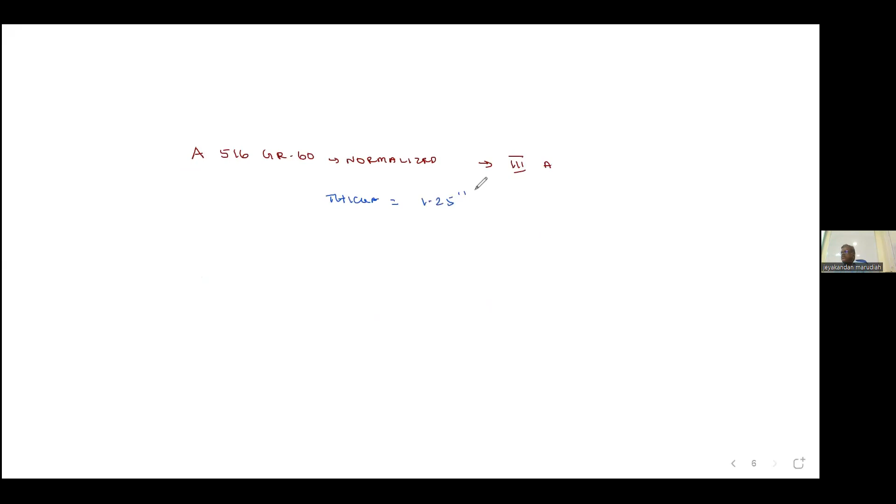Okay, so group 3A material, 1.25 inch. Now the question is, up to what temperature this material can be used without any impact testing? First we have to understand what is impact test, to check the toughness of the material. The material toughness will be reduced when it is operating at low temperature, it will become brittle.

So we are going to say, what is the question if they ask: what is the design temperature without impact test for A516 grade 60 normalized, 1.25 inch thick shell plate? So this is the exam question. You understand the question now?

So how to find out? Very simple, they have given graphs. No need to follow the graph, they have given equations, we have to follow the equation. So just go to the code book, you can see if you go here, actually this is the graph you have to follow.

Page number 4-8, follow the graph and find out. What is the group we have taken? 3A. Thickness, see inches it is given here, 1.25 inch thickness. What is our group? 3A. 3A, what is the temperature? It is very straightforward actually, minus 40. For 3A it is minus 40, but for others it will not be the same.

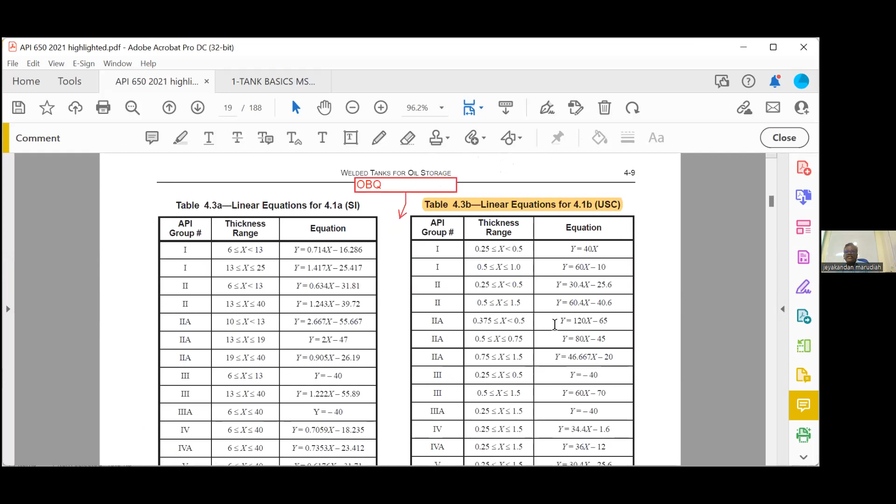So don't follow this graph, instead we have an equation here. Okay, page number 4-9, linear equation, mark it as an open book question. Linear equation, open book. 3A, you can see 0.25 to 1.5, it is straight away given minus 40. So there is, Y is equal to minus 40. So sometimes, for example, here you take 120x. X means the thickness, we have to multiply and minus 65.

So for this, the answer is very simple, but I will ask another question. So here it looks very simple, minus 40. Now I will ask another question. Try this question, and then after that you can write.

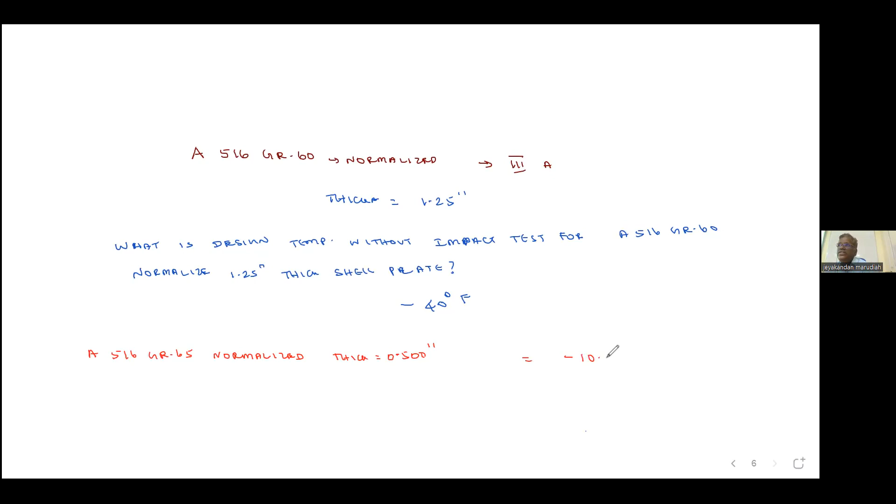So what you have to do first, you have to find the group. 516 grade 65, normalized. So 516 grade 65, this is normalized. For 65 there is a normalized group 5. So group 5 formula.

This is the formula: 30.4x minus 25.6. So 30.4 multiplied by 0.5 minus 25.6. So if you work it out, 30.4 multiplied by 0.5 minus 25.6, so it is minus 10.4.

Yes, 4 degree Fahrenheit. Is it clear? There may be one question, exam question, open question asked in this.

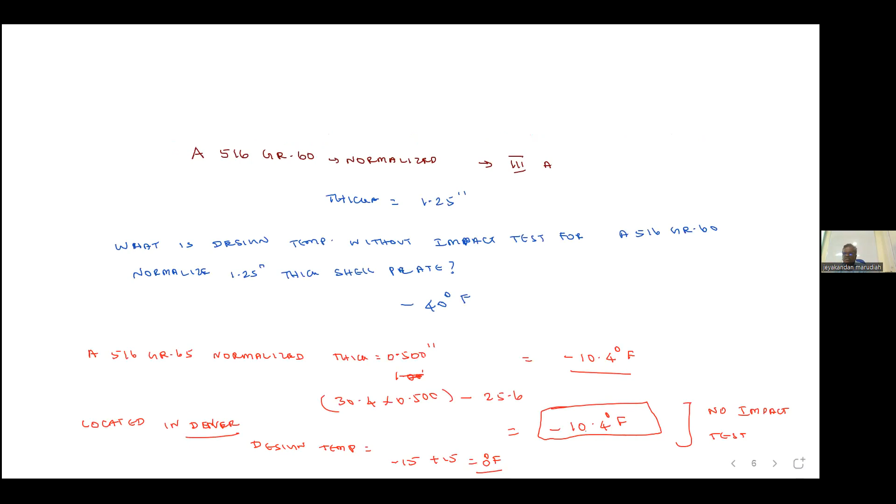For example, if you see there, what is the location here? 0. It is greater than minus 10. Minus 10 is the lower temperature. But in the location, if it is less than minus 10.4, we have to do impact test.

So if temperature is less than minus 10.4, suppose you want to use say minus 15 degree Fahrenheit, then you have to do impact test at minus 15 degrees Fahrenheit. You have to prove that this material will not fail at minus 15. So code says for this material up to minus 10.4, no testing required, it will withstand.

Suppose you are asking, no, I want to use minus 15. Then code says you can use it, provided it passes the impact test. It passes the impact test. Minus 10.4.

No need for impact test. So the problem with brittleness is only with low temperature - high temperature, there will be no brittle issue. Each material will have a different temperature, called the transition temperature. Transition temperature means at which temperature the metal becomes brittle. So for this, minus 10.4 is the transition temperature. Means more cold, more brittle.

Okay, right, now how to do the impact test? So we will watch a short video.

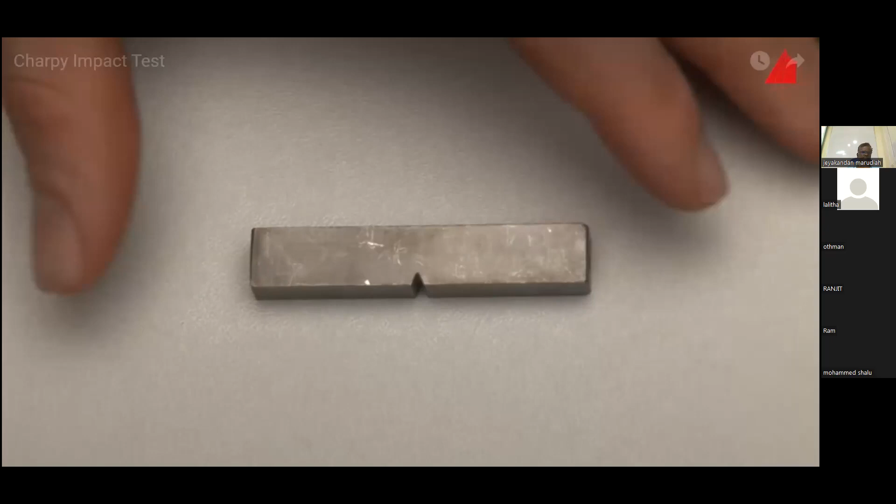First test, strain-aged plain carbon steel S235. This is our test specimen. It has been machined to standardized size and shape with a characteristic V-shaped notch. The tester places the specimen on the lower part of the machine and adjusts its position with a centering device.

Next, he turns the drag indicator downwards again and checks that everything is prepared correctly. Perfect. The test can begin.

The pendulum is released, it swings downwards and hits the specimen with its rounded hammer point. The specimen absorbs part of the pendulum's energy, so the pendulum doesn't reach the full height on the other side. The amount of energy absorbed by the specimen can now be read off at the position of the drag indicator. It only amounts to 13 joules in this test. So you can see here 13 joules, okay, but we are using foot pounds.

Now, what are the key points we should know about the impact test? First, which specification we are following for impact test? These are the important points. First point: what impact test we are using is called the Charpy impact test.

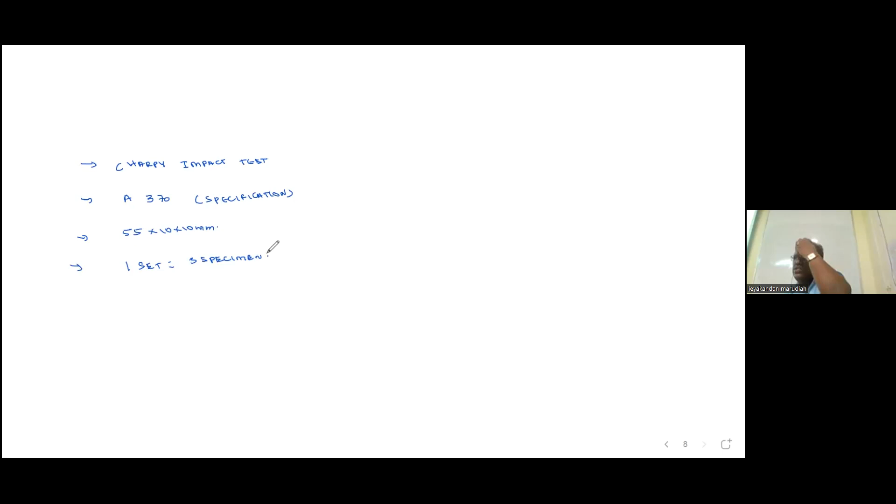Now, what should be the value? The value can be longitudinal or transverse. What does it mean by longitudinal? Because it's a material plate, if you are cutting along the rolling direction, that is longitudinal. Perpendicular to the rolling direction, that is transverse. Any direction we can do it. Now, suppose we are doing longitudinal.

See, same, take this one. What is this group number we have taken here? 516, the group number is group 5. Okay, so group 5, 0.5 inch. Group 5, our material is group 5, thickness is 0.5 inch. So what should be the longitudinal specimen value?

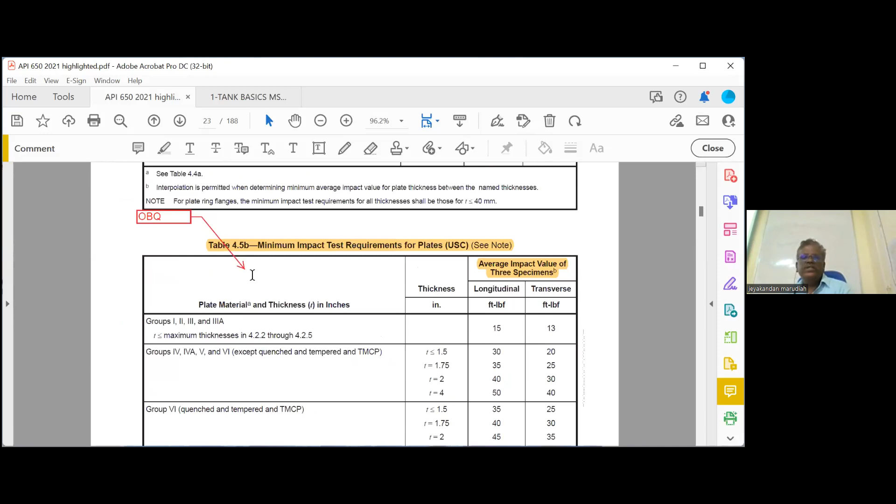Just follow this, you can write it down after, no problem. See, this table you have to refer to - again there will be A, B tables, page number 4-13. Tell me, what will be the longitudinal specimen for group 5, 0.5 inch? Longitudinal will be 30 foot-pounds. You can see here, less than 1.5 - group 4, 4A, 5, 6, except quench temper and TMCP - less than 1.5 longitudinal will be 30 foot-pounds.

Now, the next understanding is very, very important. So for the longitudinal specimen, the 30 foot-pounds is called the average of 3 specimens. So what should be the 30? The value is called average of 3 specimens.

Then please listen, understand this one. What is the minimum value allowed? Minimum value is 2/3 of the average. 2/3 of the average is equal to 20 foot-pounds - minimum for one specimen.

So minimum for one specimen - so average, we will refer to the table. Minimum value is 2/3 of the average. Now, what are the next conditions?

This is if they ask in the exam, the next ones only they will ask. There is a rule - I told you, we will not test one specimen, we will test a set of 3 specimens. Now, to get the average of 30, what should be the total value of 3 specimens?

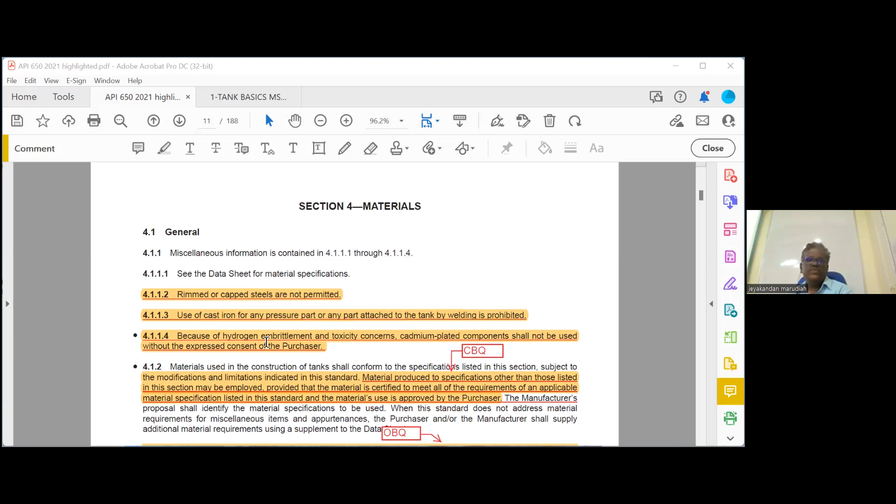This is important, close book. Material produced with a specification other than listed in this section may be employed, provided the material is certified to meet all of the requirements of an applicable material specification listed in the standard, and the material use is approved by the purchaser. Suppose we have seen six group materials; you want to use other material not from this group, it is allowed by the code, provided the purchaser or owner accepts it.

Then, when any new or unused plate and pipe material cannot be completely identified with records satisfactory to the purchaser as material conforming to the specification, the material or product may be used in the construction of tanks covered by the standard only if the material passes the test in Annexure N. So Annexure N is an open book question. Suppose you have a material without any identification, we don't know which group this material belongs to, so you have to test it as per Annexure N and we can use it, provided the purchaser accepts it. Annexure N.

Then another one is very, very important. Now, you remember I told you group 1 to 3 is low strength material, group 4 to 6 is high strength material based on the tensile strength. Suppose you actually have to use a group 3 material, but you don't have stock of group 3 material, and now you want to use group 4 or 5, arguing it is high strength - what is the problem? It is not like that. You cannot on your own decide to use high strength material. You have to get the approval of the purchaser. The owner should approve it, and you have to specify it in the material data. We have to specify everything.

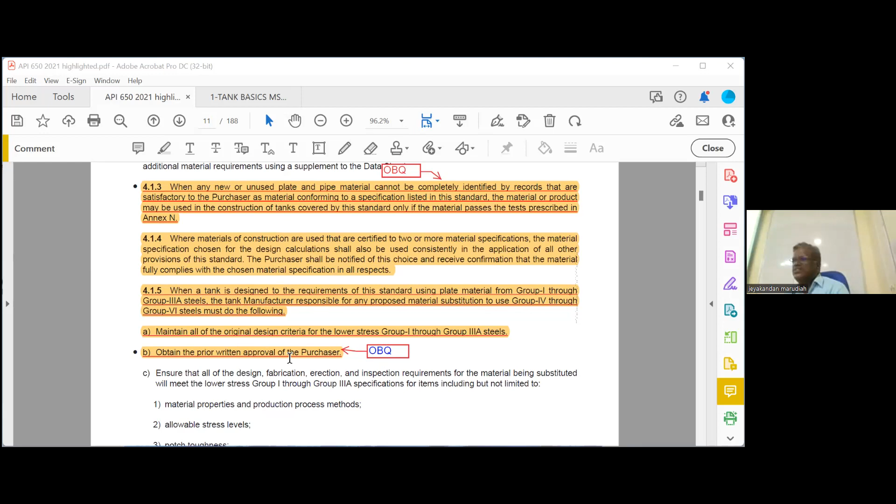This is important: when a tank is designed to the requirements of the standard using plate metal from group 1 through 3A steels, the tank manufacturer responsible for any proposed material substitution to use group 4 through 6 must do the following: maintain all the original design criteria for the lower stress group 1 to 3 - you have to treat it as the lower group only, even if you are using a higher group, and this is open book - and obtain prior written approval of the purchaser. The purchaser should give in writing that it is allowed, for example group 4. That is important, open book question. Mark it as open book question.

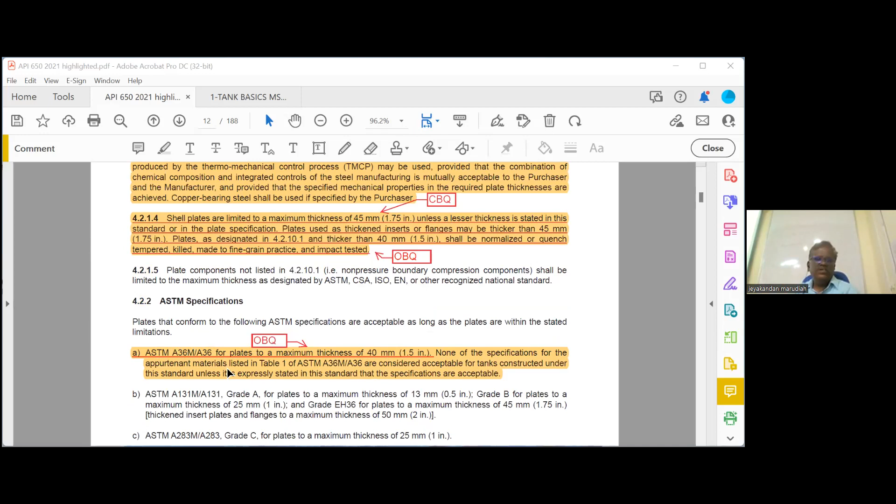These are not very important, even though your question bank has them. ASTM A36 plates - maximum thickness 40 mm only we can use. Just to highlight, mark it open book because it is covered in your question bank. These are not important - each material has some maximum thickness limit. Next page, A283 grade C, maximum 25 mm allowed. That is also an open book question because it's covered in your question bank, so just to locate it.

Then 4.4 - this line is important, 4.2.7.2: all welding performed to repair surface defects shall be done with low hydrogen welding electrodes compatible with the chemistry, strength, and quality. Suppose you want to make a repair on a plate damaged during transportation - it is allowed by the code. You can make a welding repair, but you have to use only low hydrogen electrodes. What is a low hydrogen electrode? E7018, 7016, 7015 - okay, these you can use. Open book question.

Then impact testing - please go to page number 4-6. When required by the purchaser or by 4.2.1, a set of Charpy V-notch specimens shall be taken from plates after heat treatment. Suppose you are going to do PWHT - impact test shall be only after heat treatment, and the specimen shall fulfill the stated energy requirements. Highlight this line.

Then this is a closed book question, first one: an impact test shall be performed on 3 specimens taken from a single test coupon. So 1 set means 3 specimens - that is important.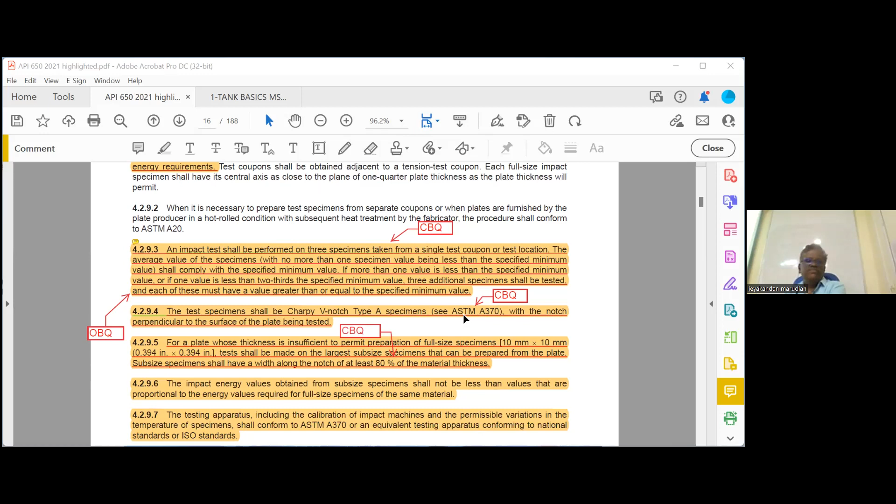Now, what is the size of the specimen I told you? 55 by 10 by 10. So what is the 10 by 10?

10 mm width, 10 mm thickness, 55 mm length. Suppose your plate thickness is only 8 mm, you cannot make a 10 mm specimen. When thickness is only 8, those specimens are called subsize specimens. What should be the notch size? It is called 20% notch. 10 mm width, we will have 2 mm notch, which is 20% of the 10 mm.

Highlight this one: for plate whose thickness is insufficient to permit preparation of a full size specimen (10 into 10), test shall be made with the largest subsize specimen that can be prepared from the plate. Subsize specimen shall have width along the notch at least 80% of the metal. Suppose you are making an 8 mm specimen, 8 mm 20% we have to take notch, which will be 1.6 mm notch.

That is important. Then please go to page number 4-8.

Figure 4.1b, minimum permissible design metal temperature of metal used in tank shell without impact testing. I told you, no need to refer to this picture, you can use a calculation instead, it will be easier. Suppose you have doubt whether you used the correct calculation, you can cross check with this figure here, during exam, whether your value is correct. It will give an approximate value. So this equation is an open book question, mark it as such.

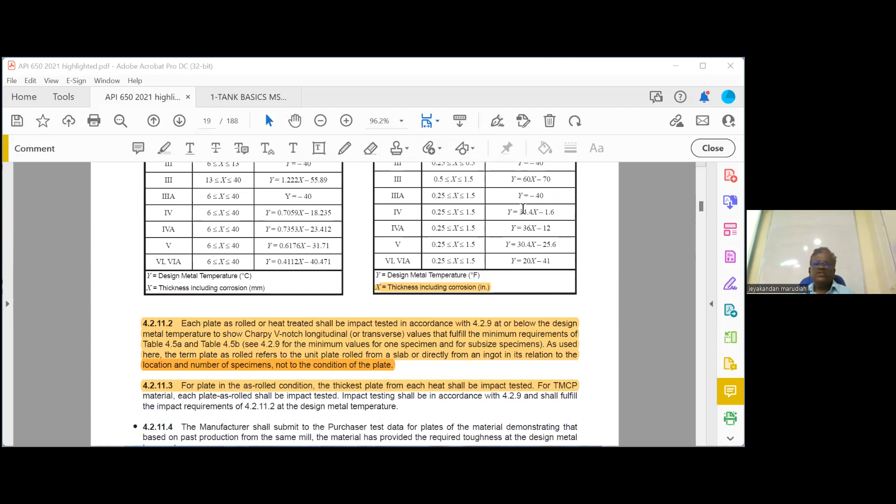Then please go to the next page. I told you this is the map of US. Definitely there will be a question, it is an open book question.

Just highlight the cities, because generally they repeat something. Los Angeles, they asked in the exam. Denver, they asked in the exam. Oklahoma City, they asked in the exam. Indianapolis, they asked in the exam. Birmingham, they asked in the exam. Dallas, they asked in the exam. Just highlight this one, so if it is repeated, you can easily locate it, otherwise you have to search.

So last exam, Los Angeles was asked. Before that there was Denver, before Oklahoma, Dallas, Birmingham, Indianapolis.

Then please go to page number 4-12, material groups. Just highlight this one, so you know how to refer the metal group. Read the question carefully, as normalized, some material may have 2 groups.

Then please go to page number 4-13, Table 4.5b, that is an open book question. Now we have seen how to check the impact values, that is also an open book question.

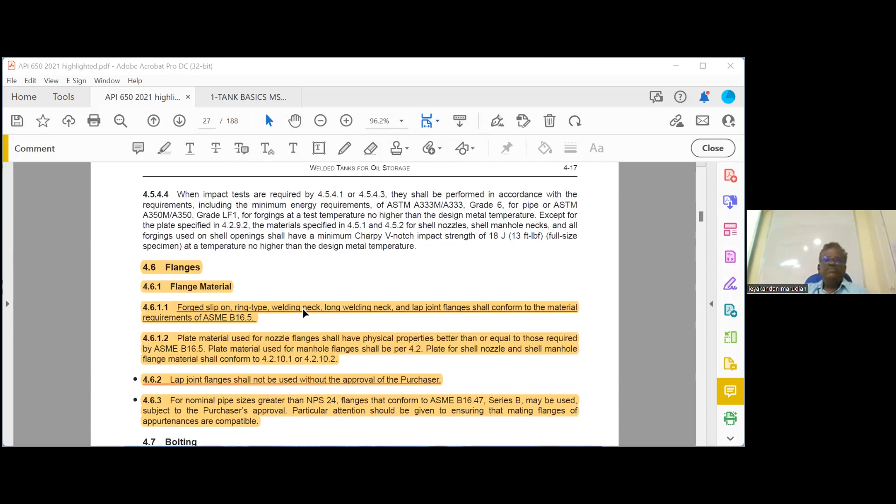Then please go to page number 4-17. Just highlight, these are not very important. Section 4.6.1, flange material: forged slip-on, ring type, weld neck, long neck, and lap joint flange shall conform to material B16.5.

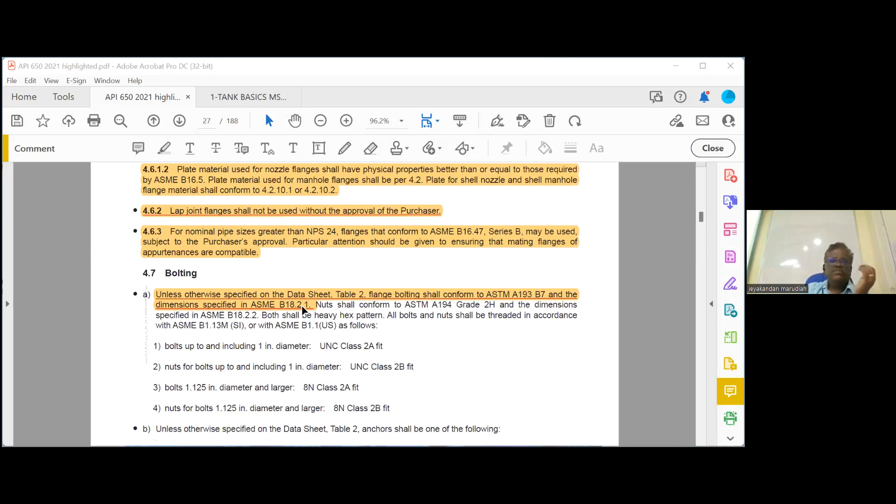Section 4.6.2: lap joint flanges shall not be used without approval of the purchaser. Highlight this one, lap joint you cannot use without the approval of the purchaser. For bolting: unless otherwise specified, flange bolting shall conform to ASTM A193 B7, and the dimension is specified in ASME B18.2.1.

Then next page, 4-18, section 4.9.1.2. Suppose you have a metallic gasket, gasket welding is permitted, you can make a gasket weld and use flush grinding. This is allowed by the code for metallic gaskets. Sheet gasket shall be continuous. Metal gasket made continuous by welding are acceptable if the weld is ground flush and finished the same as the non-welded portion of the gasket.

Rope or tape gasket should have overlapped ends. When attaching the gasket, you should not put any paste. Only a single gasket should be used, no more than 1 gasket is allowed. Again, these are not very important.

Highlight it: no joint sealing compound, gasket adhesive, jointing, or lubricant shall be used on the sealing surface of gasket or flanges during joint makeup unless specifically allowed by purchaser. So for everything extra you want to do, you have to get the approval of the purchaser, very simple.

That's all for chapter 4. I told you there will be 2 to 3 questions from chapter 4. So far we have taken a half day class, and covered around 5 questions.

That's all. Now chapter 5 is the design chapter, the toughest chapter of the 650 code. It's running for more than 60 pages, but we will skip most of the pages, only selective topics we will cover. It will have around 5 to 6 questions, not much, but we will cover them. So let us start with...

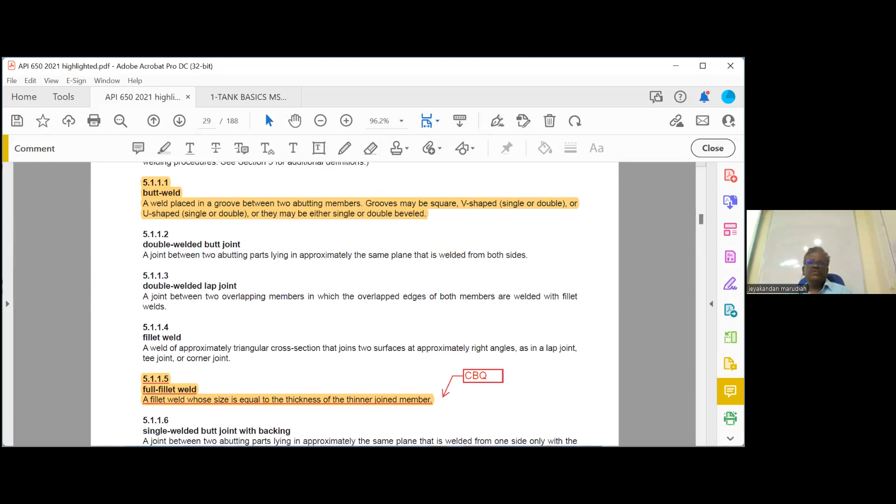So what is this joint? Lap joint. This is called a lap joint, and this welding is called a fillet. And this dimension is called the leg dimension.

So as per code, weld size equals leg length. Weld size means, as per American code, it's different - for American code it is leg length only. So what should be the minimum weld size? They are also asking about 6 mm.

So code has 2 rules. Minimum size is equal to 5 mm. Any weld you are making on the tank, it is a common requirement. What is the minimum weld size? 5 mm - I am using mm so that you can easily understand it.

But there is one more rule. Suppose very high thickness, can we use just 5 mm? No, there is another rule. It should be at least 1/3 of the thickness, where T is the thinner plate.

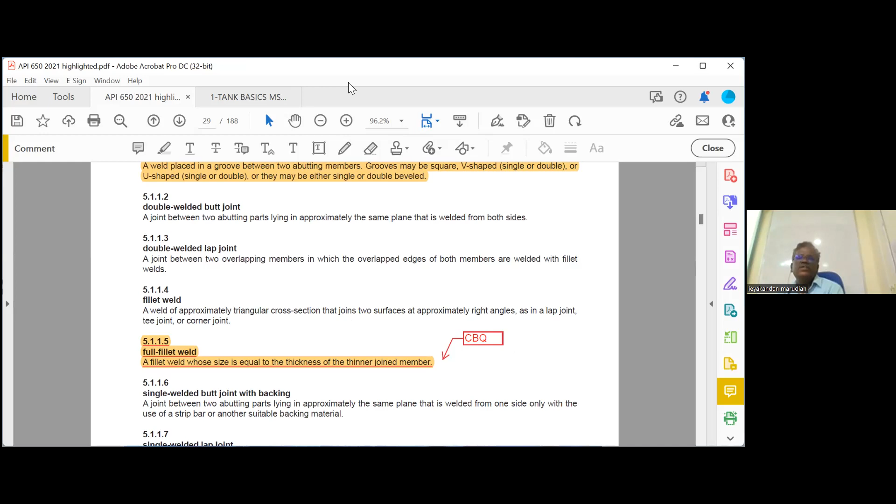Length, weld leg length 8 mm, the equal fillet - sorry, full fillet weld. So mark it.

Now tack weld - what is the purpose of tack weld? Alignment purpose, so highlight this: a weld made to hold the parts of a weldment in proper alignment until the final welds are made. That is a tack weld.

Then there are many requirements, I will go one by one explaining. This is a little bit of a tough chapter, no problem, we will explain everything. First, 5.1: tack weld shall not be considered as having any strength value in the finished structure. So tack welds have no strength as per code - it is just for alignment purpose. That is a closed book question. Then this is what I said.

The minimum size of the fillet weld shall be as follows: for plates 5 mm thick, the weld shall be a full fillet weld, 5 mm - you have to weld 5 mm, and minimum size is 5 mm. And for plates more than 5 mm, the weld thickness shall be not less than 1/3 of the thickness of the thinner plate at the joint and shall be at least 5 mm. So you have to go for 1/3 of the thickness of the thinner plate, but at least it should be 5 mm - it cannot be less than 5 mm.

See, bottom and roof, we are using lap weld. Lap weld - both sides, no need to weld. If it is a lap weld, there will be two sides actually, you can weld the other side also, but that side welding is not required. Only single side laps are allowed. Single side bottom there will be weld on top side, and inside for the roof also, top side is allowed.

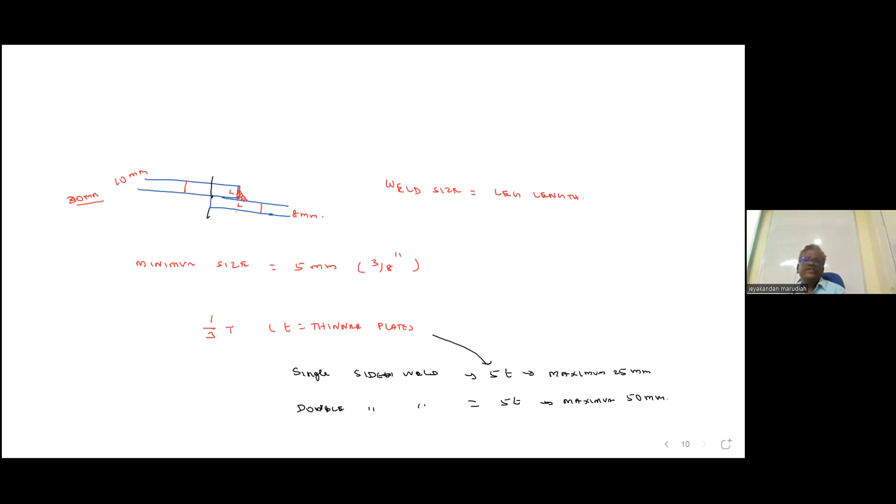So highlight this one. Double welded joint shall be lapped at least 5 times nominal thickness of the thinner plate or 50 mm, whichever is less - that is important. Single welded joint shall be lapped at least 5 times nominal thickness of the thinner plate or 25 mm, whichever is less - that is important.

Right, this is very important. See, whether we can weld single pass or multi-pass. For group 1 to 3, if making manual welding more than 6 mm, we have to use multi-pass welding. Manual means SMAW, not GTAW. But if using automatic process like semi-automatic - GMAW, FCAW - more than 10 mm, we have to use multi-pass welding. But for group 4 to 6, compulsory 2 pass is mandatory, any thickness, you cannot weld in a single pass.

Again, I will repeat. Group 1, 2, 3: thickness 6 mm or less, single pass also we can weld; more than 6 mm only multi-pass. But for group 4 to 6, compulsory 2 pass you have to make.

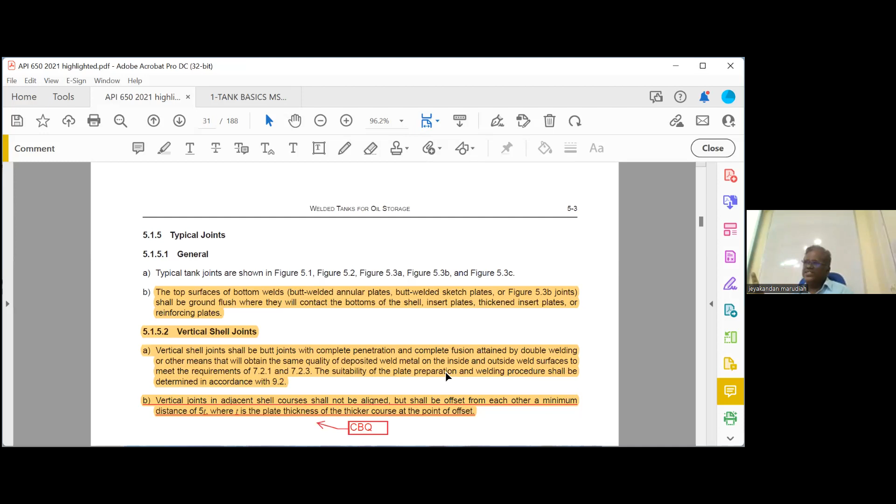Then vertical joints, shell joints - this requirement I already told you. Shell joints, how much you have to stagger it? 5T, here T is the thicker plate. Bottom lap T is the thinner plate, roof lap T is the thinner plate - bottom roof will follow the same way. For lap joint, T is the thinner plate. But when you are doing butt joint, the staggering T is the thicker plate.

So this is a close book question. Vertical joints in adjacent shell courses shall not be aligned, but shall be offset from each other minimum distance 5T, where T is the plate thickness of the thicker course at the point of offset. T is the thicker course.

Sir, sorry sir, English please. Sir, which are the ones you mentioning - this small t - can you differentiate between small t and capital T, sir, please?

There is no difference between small t and capital T. Anything you can take. T is the thickness - for lap joint, whether it is capital T or small t, there is no difference, I just put it wrongly. T means thickness. For lap joint, T is always thinner plate. For butt weld staggering, T is the thicker plate. Everywhere they are using only small t, they are not using capital T. So butt weld means thicker plate, lap joint means thinner plate.

Correct, okay, right. So what is meant by 3 lap in tank bottom?